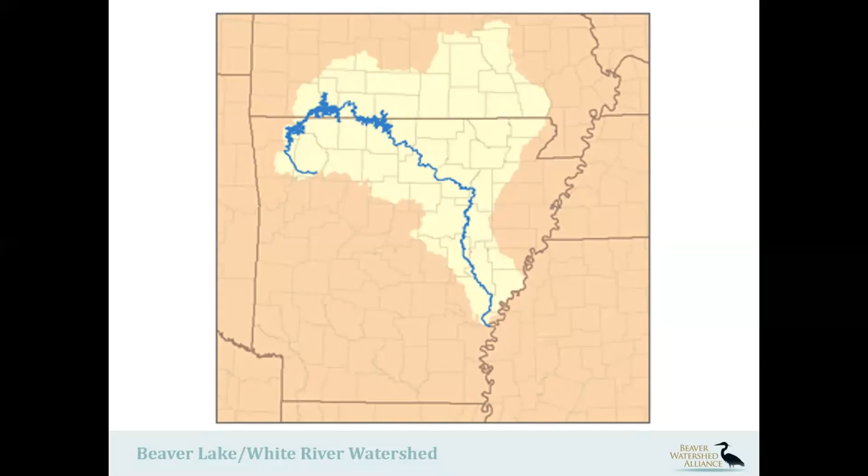Beaver Lake itself was dammed back in the 1960s for flood control. Over the years, though, it became our central water supply. So Beaver Lake is actually our water supply for 1 in 6 Arkansans here in Northwest Arkansas. And this is a picture of state priority watersheds. This watershed is a state priority because it does have stream reaches that are considered impaired, which means they don't reach their designated use, and they are listed on the 303(d) list. So there's a number of different agencies and partners working to address these impairments through different voluntary practices. So anything we can do to help improve water quality, to maintain a healthy watershed, is our goal.

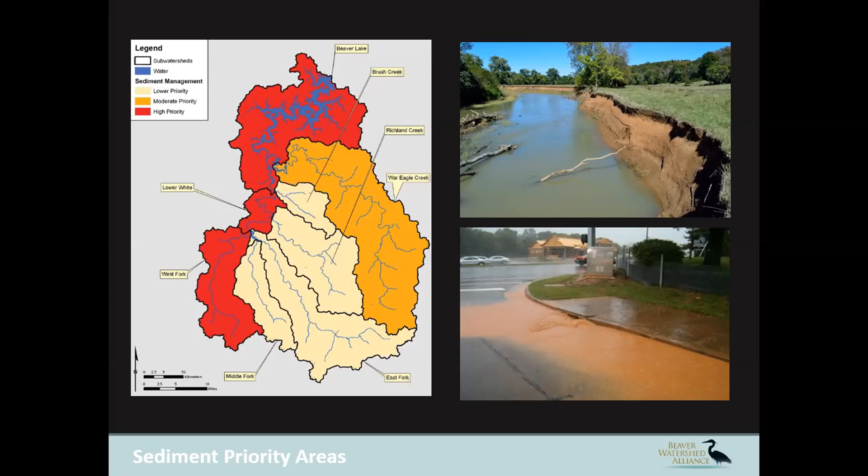So in 2017, the Beaver Watershed Alliance applied for a 319 non-point source grant, and that was awarded $500,000 to install 3 low impact development projects in the watershed. So these are basically demonstration projects where we're going to install permeable pavers, bioswales, rain gardens, things like that, along 3 different parking lots in the Northwest Arkansas area.

So one of them is going to be at Mount Kessler, which is a ball field in Fayetteville, Arkansas, partnering with the city of Fayetteville. The second project is going in at Hickory Creek Boat Launch, partnering with the Army Corps of Engineers. And the third project for the green infrastructure is going in at Mitchison Park, which is located in Huntsville, Arkansas.

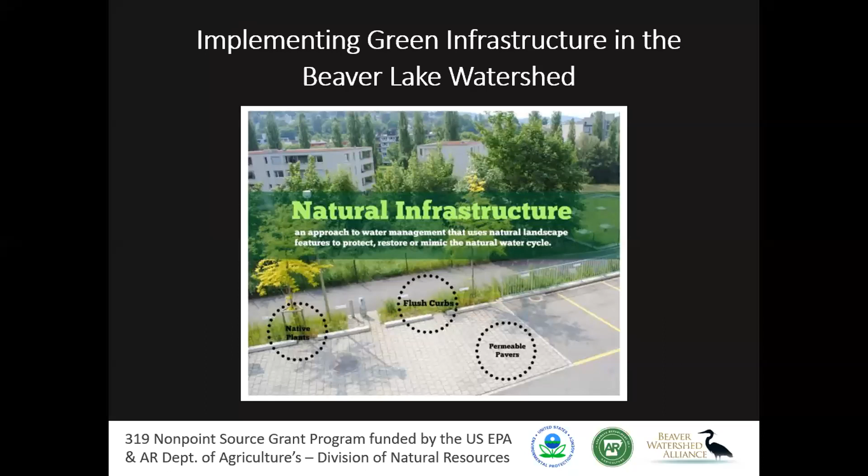So we're really excited to see those being installed this year. Designs have been finalized, and we really look forward to these installations to demonstrate these green infrastructure and LID elements. We also have a number of partners that help us accomplish watershed stewardship. So we want to thank all of our partners that support the Beaver Watershed Alliance and promote healthy water quality for our region.

Okay, so next I'm going to hand it off to Anthony Kendrick. Anthony is a project manager for Construction EcoServices, and he received his bachelor's degree in biology and master's degree in environmental science from the University of North Texas. Before he joined Construction EcoServices, he spent 3 years working for an environmental engineering firm. Currently, Anthony manages green infrastructure projects in the Texas and Louisiana areas while assisting the design community and municipalities to implement multifunctional stormwater management solutions.

Anthony has a passion for sustainable stormwater practice that enhances the built environment. He's dedicated to educating engineers and designers in the practice of the next generation of low impact development. So with that, I'm going to hand it over to you, Anthony.

All right, guys. Well, thank you very much, Becky, for the introduction. Today we're going to talk about how we can use permeable pavement in stormwater management, and then most importantly, what is the best way to keep these systems working?

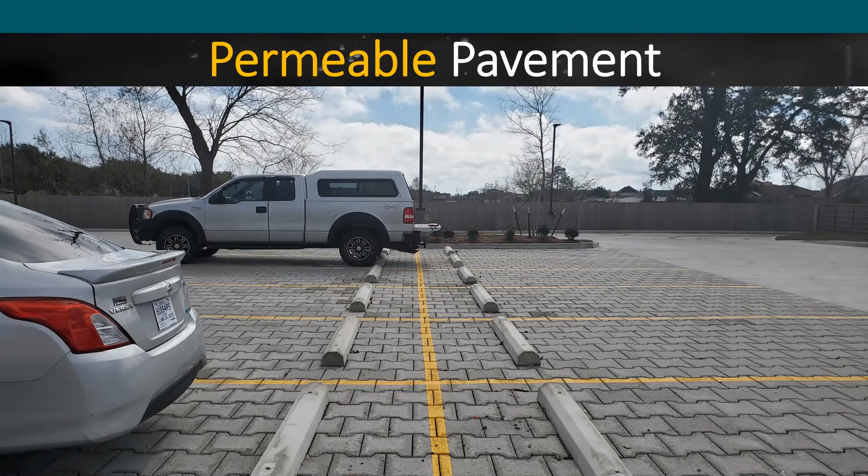So my favorite BMP has kind of switched over to permeable pavement. We've been doing so much of this in New Orleans, and in fact, the ordinance here got updated recently to where every parking stall on a commercial development over 5,000 square feet must be permeable pavement. And so some of these owners who have these large developments can have 200-300 parking stalls that they have to maintain. And so as a designer, you have to be cautious as to what type of pavement you use, how you design it, because you don't want to have that owner pumping lots of money into their budget just to maintain a permeable pavement system.

So these are just either traditional pavers, or sometimes the pavers will have little bump outs and there's a gap in those pavers and it's filled with aggregate. So that allows that water to infiltrate off the paver and into the joint, which then goes into your subbase. That's also a very common practice.

And another thing that I've also seen in New Orleans and also in Houston, this is a pretty big product that they use in the Gulf Coast, are these gravel pavers. So these pavers can be filled with either grass or gravel. It's a very low cost option, and so that's another type of pavement they use.

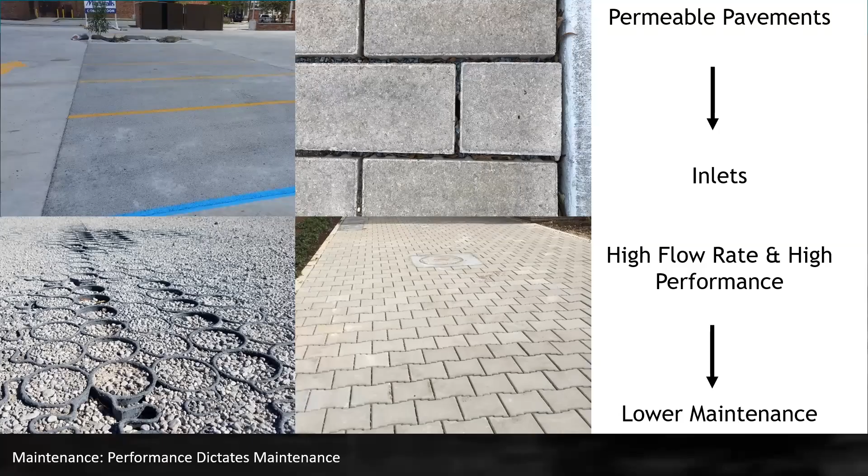So the grid structures, you'll see all different types of products for these. The main difference in the different products you're going to see is what type of plastic it's made out of, and also the height of it. So this vendor right here, they name theirs E30, E40, S50, and really what that relates to is the height of the grid. So the E30 is a little over an inch in height. The E40 is about 1.5 inches, and then the S50 is 2.

It's a European company, so they're using millimeters, and so that's important because that's the height of the gravel that you're infilling. And also the shorter grid structure, that's probably gonna be more for residential, while the E40 module, or say if it's a 2-inch paver or 1.5-inch paver, that's gonna be more for commercial and even heavy industrial applications.

So most of these are all pretty much constructed the same way. You're going to lay down a plastic grid and either fill it with aggregate, or sometimes they'll fill it with soil for grass. And the base of them are pretty much all the same too. They're going to sit on a 57 stone base. Sometimes you can do a choker course of smaller aggregate, but these work best when you just sit them directly on the 57 stone, because it allows that water to get into your base a lot quicker.

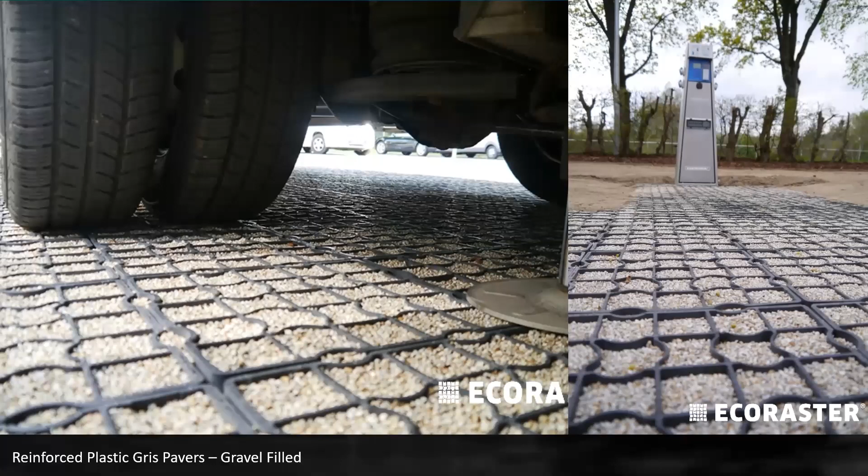And the way that you install these is you don't actually overfill the paver. So you fill the gaps and the voids just enough to where when the wheel load actually traverses across the surface, the load is spread out between the grid structure and the aggregate within it. And we'll talk about why you don't want to overfill your pavers later on, but this is kind of the design intent of this product, to transfer the load between the grid and the rock itself.

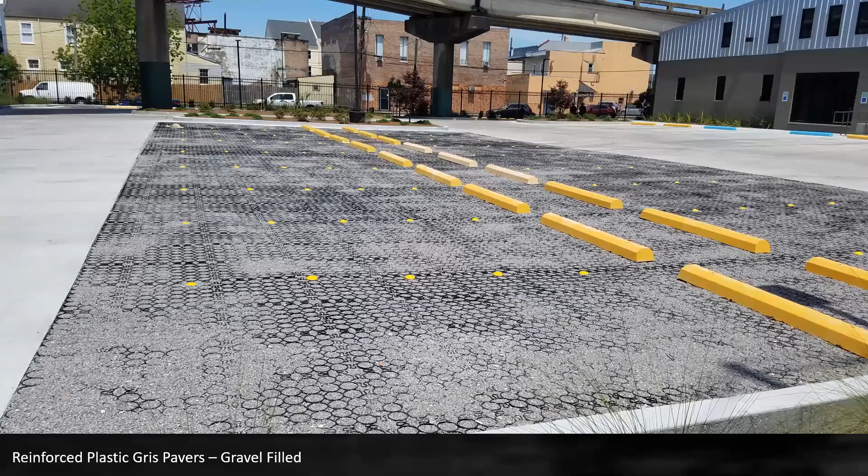Here's a really cool application, I think, of using these gravel pavers. So they're a pretty low cost option. Most of these run like $2 to $3 a square foot. And then they fill it with either some type of chip rock, pea gravel, whatever is locally sourced. The challenge for these, we'll talk about later, is the maintenance.

Since you are filtering your runoff and sediment debris through rock, it can be a challenge to keep it clean. And so the best way to really prevent having to do any maintenance on these or rip them up and reinstall them is when you design them, you really only want to have a 1-to-1 drainage area ratio. So in this project, they do have a little bit of the drive aisles that drain into it, but mostly this is really only accepting rainfall.

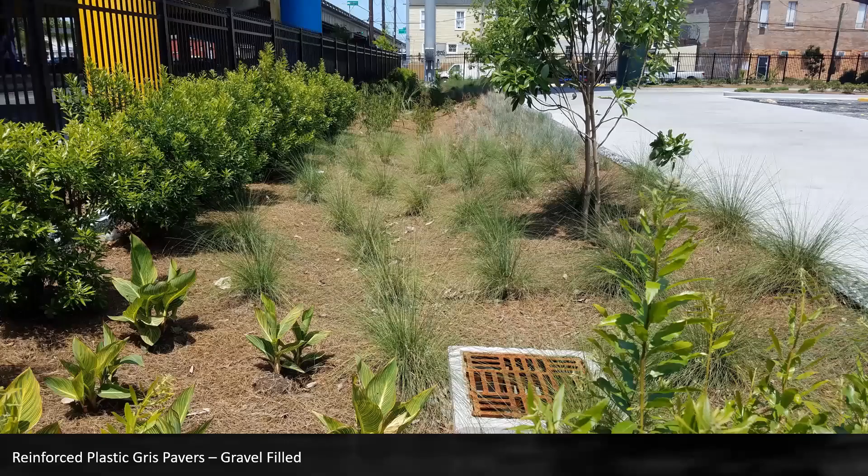And they also slope the entire site so that if the pavers do clog, say over time they start to reduce their infiltration rate, there is a stormwater bioswale on the lower side of the property. So that ensures that even if the owner doesn't maintain it or the system starts to clog over time, there's a way for that water to get off the property.

Because that's always something you want to consider when using permeable pavement, is your safety factors. You can't always assume the owner is going to do maintenance. You can't always assume that it's installed correctly and that it's going to perform as it's intended to. So you want to build some type of redundancy or safety factor into your design.

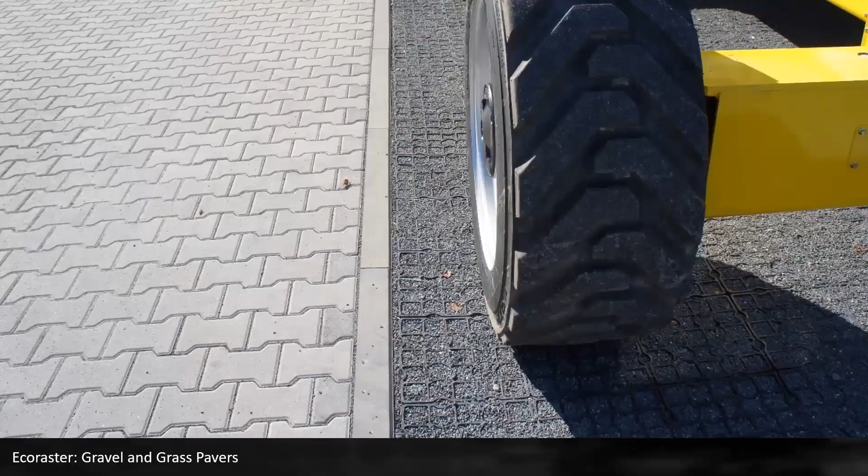And what's really good about these gravel pavers is if you want to use traditional pavement next to it or other types of permeable pavers, these work well. You can lay them in together. You can separate them out by curbs. And then you can also use different options.

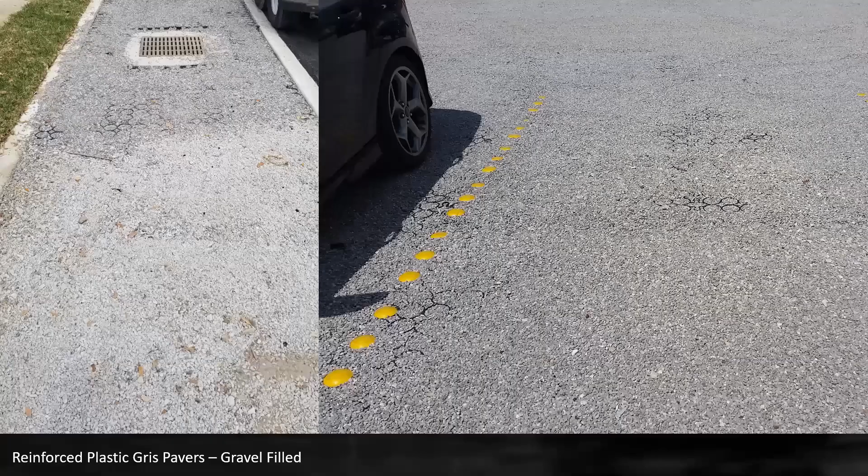So like I said, I think one of the ways that this product gets installed incorrectly or misapplied is when they end up putting too much chip rock on top. And the reason that's not good is because the chip rock, the smaller rock, doesn't handle traffic load well. It can actually crush and turn into a powder or a fine sediment. And what happens is that fine sediment can then clog the rock voids below.

So whenever you see projects where the grid surface is somewhat visible and then they have maybe an inch or two of gravel over top of it, over time, what's going to happen is that crushed limestone falls within the voids of the rock, and then it rains. And we all know what happens when you mix crushed limestone with water. You get concrete. And so to really ensure that this won't happen, you've got to make sure that your installer does not overfill the pavers.

And then also you want to make sure you use a rock. We'll talk about this later with abrasion tests, but you want to make sure you use an aggregate that has enough hardness so it can handle that traffic load. So you can see in this picture, this is really, really small diameter rock. So this is probably not the best type of rock you want to use. I've seen 57 stone, I've seen pea gravel, but you probably want to use a little bit larger diameter rock than what you see here.

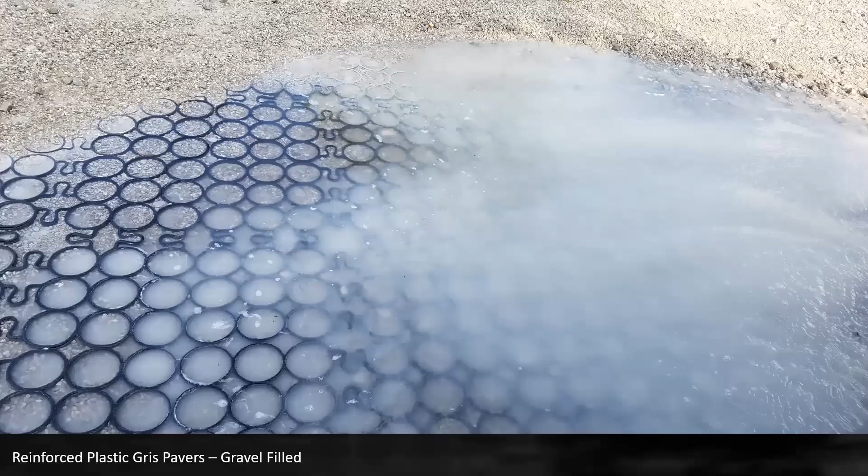And then what can happen, you get ponding water, and you can kind of see in this picture in the top layer how much overfill they have. And then this is just kind of the result. And so you see this a lot when owners think, oh, the grid surface is visible, we need to put more aggregate on it. But you've got to let them know that that's not how it's intended to be.

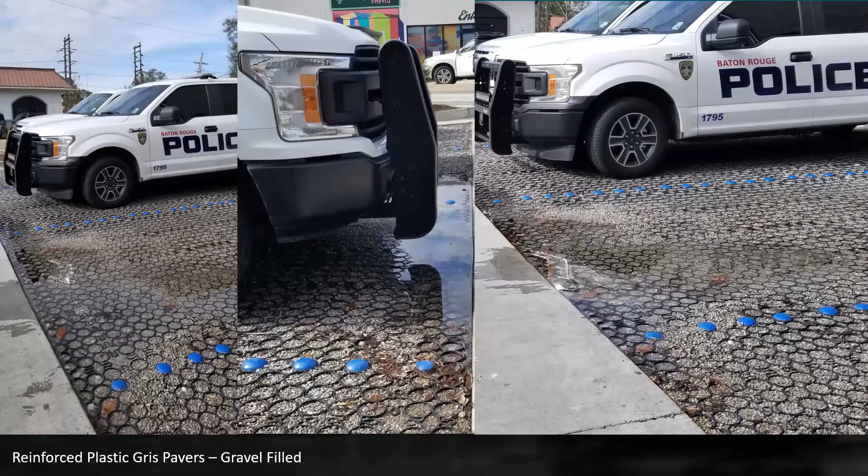And another issue I've seen is where they will put these gravel pavers in areas where you probably don't want to. And so in this situation, this is a restaurant where they put the gravel pavers where the delivery trucks turn around. So this is the only area where a delivery truck can get in and make a U-turn and get out of there. And what happened was this driver accidentally jackknifed and ended up pulling up some of the pavers. So it probably would have been better if they had done a traditional pavement in the drive aisle and kept the gravel pavers in the parking stall.

So these types of pavers work really great in parking stalls. And then if you do want to use it in a drive aisle or where you have a lot of heavy traffic, you probably want to upgrade to the thicker or taller module where maybe you have a 2-inch height, because those can actually handle those types of traffic. While the paver they used here was probably more on the inch or inch and a half height. And so it just makes it really difficult for that paver to handle that traffic load.

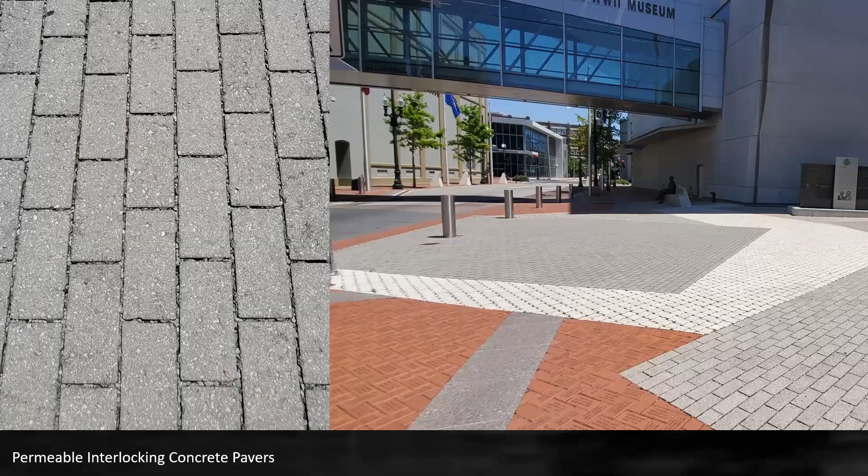So our other type of pavement is the permeable interlocking concrete pavers. This is actually one of my favorite applications of this type of paver. This is at the World War II Museum in New Orleans. And I don't know when they installed this, but if you go out there, these are probably the cleanest looking permeable pavers I've ever seen. They only really get pedestrian traffic. They don't actually ever get any vehicle traffic on it.

So if you go out there, the aggregate looks really clean. It drains down really well. And they also have different patterns in there. And you can kind of see in the picture on the left, you can still see all the aggregate in there. And you don't see much sediment and debris. And that's also attributed to the fact that there's really not a lot of landscape to blow in any kind of leaf litter or debris.

And so this is a really cool application of these pavers in a pedestrian application. And you can see where they did different types of interlocking pavers. So you have these other pavers where they just use the joints along the edges, and then these other pavers basically have the open joint on the corner of the paver. So there's all different types of vendors out there.

And really the big cost difference you'll see between this paver and the gravel paver is the installation cost. The labor to install concrete pavers is much more than your gravel pavers. There's not as much forgiveness with these when you're laying them down. You want to make sure the subgrade's level. So we'll talk about the different costs of these systems, but concrete pavers can be more on the high side.

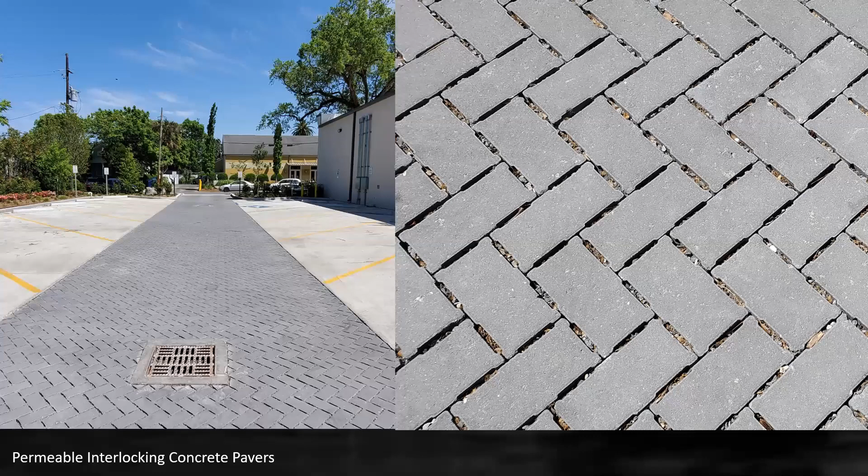And here's a cool application where the parking stalls actually drain to a drive aisle here. And you can see all the aggregate in those joints. This project's actually fairly new, and it hasn't got a lot of traffic because it opened up shortly before the pandemic hit. But they're already starting to see some leaf litter in the joints, and you can see there's a little bit more landscape around here. So in the long-term maintenance of this system they're going to have to really think about how much surrounding landscape is going to start to clog the system.

All right, so we just got a question. Can the gravel pavers or interlocking concrete pavers be ADA compliant? Yes, so far all the projects I've seen have been ADA compliant. In fact, I know the gravel pavers even have parking markers that you can use for handicap spaces as well. But one thing to consider is over time, if the pavers start to sink or have subgrade issues, or if the owner overfills the gravel pavers with gravel, then they can become out of ADA compliance. But generally when they're first built, they do meet all those requirements.

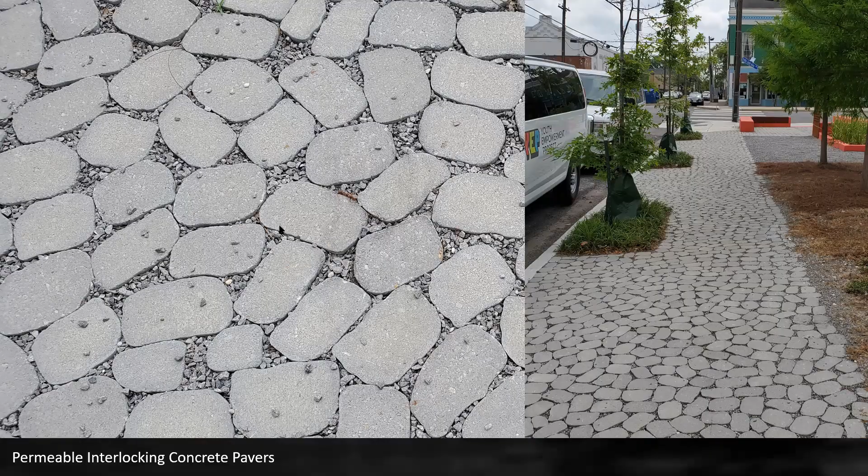So another thing to consider with interlocking concrete pavers is, since you're using aggregate to fill in those joints, they're going to clog quicker than if it was an open joint. So this is a project where the owner really didn't do a lot of maintenance. They had some construction sediment actually clog some of these pavers, and you can see these interlocking concrete pavers are turning into grass pavers. This can be an issue with a lot of concrete pavers if you don't maintain them on an annual basis. What's going to happen is you're going to get ponding water.

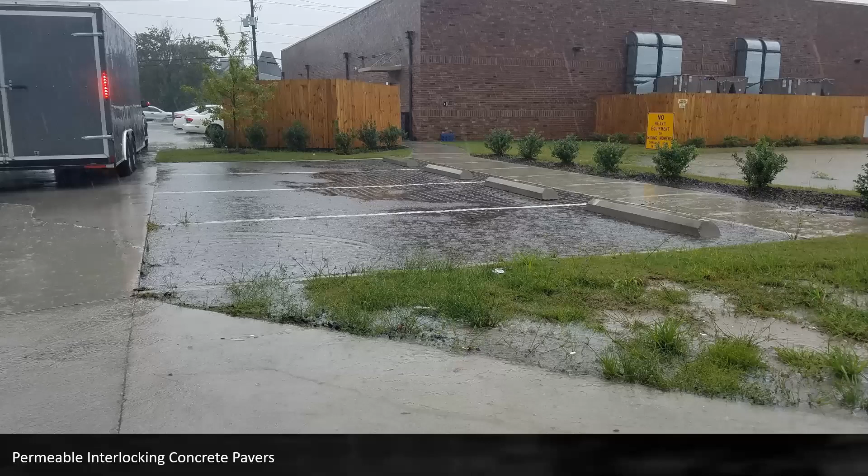And you can see the water that's ponding in these parking stalls, and this is during a pretty big rain event. It was probably about 4 inches of rain we got that day. You can see that pattern matches where all the grass is filling in these joints. And so that's something to consider.

Most of the time you want your permeable pavement to drain pretty quick, especially if it's in parking stalls, because if it takes an hour or 2 hours for that water to finally infiltrate off the surface, that's going to be difficult when you want people to park at your place and they end up stepping in the water. So we'll talk about the maintenance frequency, but I think interlocking concrete pavers hold up better than your gravel pavers, but they do require annual maintenance to make sure that they don't end up becoming a nuisance.

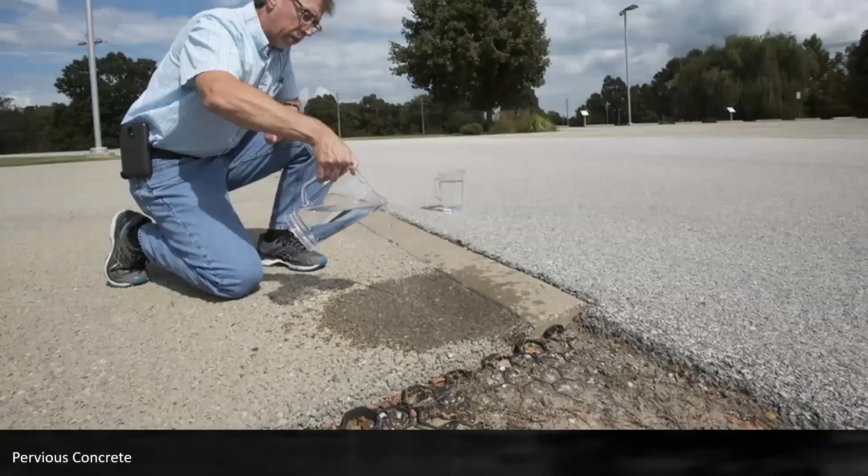All right, our third type of permeable pavement is our porous pavement. So here, this is the pervious concrete that they actually have at the Beaver Watershed Alliance, their main office. And the good thing about permeable concrete is that the entire surface is permeable. With the interlocking concrete pavers, we really only have the joints, but with this type of pavement, you have a lot of surface where you can infiltrate water.

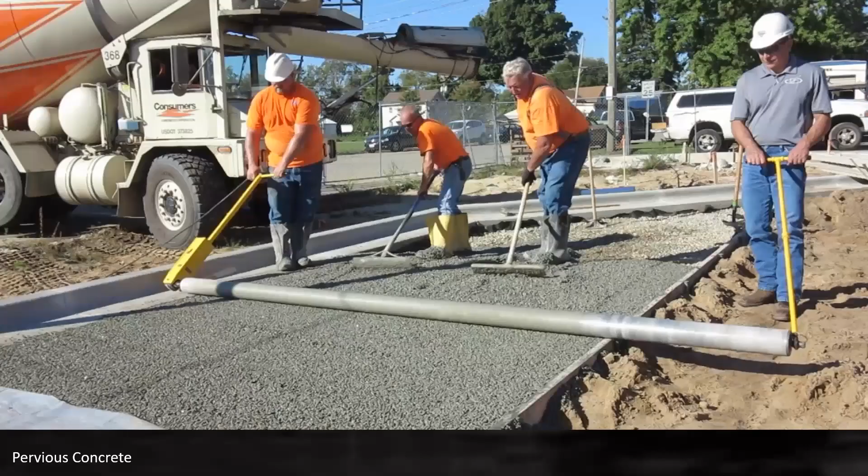So that's good because it kind of takes care of your design safety factors, because you have that whole footprint to permeate water. Now, the difficult thing with permeable concrete is the installation process. So it's much different than traditional concrete.

So the way permeable concrete, or I think the same goes for porous asphalt, is able to soak up water is they actually remove a lot of the fines. So concrete gets a lot of its strength from the rebar and all the fines that they put in there. With permeable concrete, you don't use any rebar, and you also take the fines out.

So in order to counteract that, since those items actually provide structural strength, you actually add a binder, a chemical binder. It's almost like a glue, and what that does is bind all the loose aggregate together while still allowing some voids and open spaces for that water to travel.

And so when you install permeable concrete, you need to make sure you have the right conditions. You can't do it on a super humid day. You also have to make sure that the concrete cures for over a week. So they actually have to cover it with a visqueen layer or an impermeable layer for a whole week to make sure it cures. And if it's not installed correctly, you will have some issues.

And so what I've seen on a lot of projects is you'll see certain parking bays where the permeable concrete looks really good. And then other areas where, let's say the conditions weren't right, or the contractor might've got hurried, their schedule didn't allow them to have as much time to install it. And they'll start having issues where the concrete actually starts to ravel off.

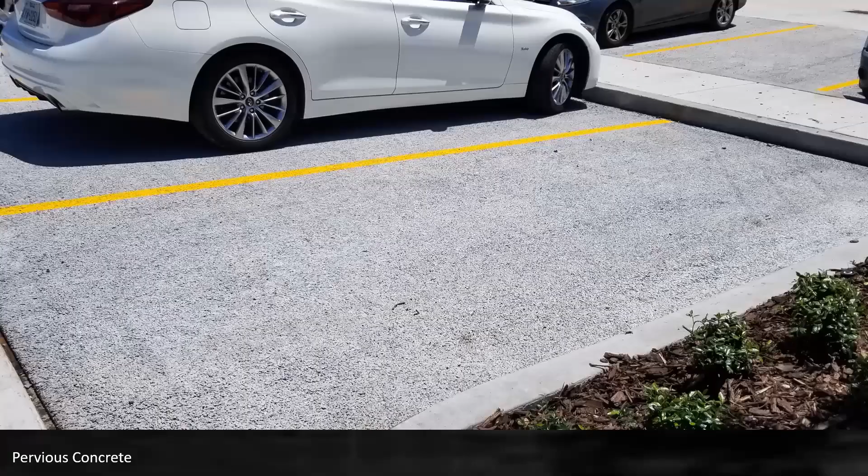And so here's a project where you go out on the site and a few of the parking bays look really great. They perform great. They're getting about 800 inches an hour as the infiltration rate. And on the same project, one parking bay over, the permeable concrete looks like it's falling apart. And so I think with a lot of those inconsistencies, it's going to take a lot for contractors to make sure they're very consistent, but these are some of the risks that you're going to get with permeable concrete.

If you don't have an installer who's really good at this or who specializes in this, you're going to have areas where the binder and the glue, maybe it was too hot that day or there was too much moisture in the concrete. There's a lot of factors that could contribute to this, but what happens is that binder and glue ends up actually breaking down over time.

And I think here along the Gulf Coast, we have a lot of issues with this. And I think that has to do with the fact that we have high temperatures, it's very humid, it rains a lot. We have a lot of vegetation and landscape that can clog it. And so what happens is we see a lot of binder and glue breaking down, and you can actually see where the parking stripe almost disappeared from the site. And so that can be a challenge, and that's something you want to consider in your design.

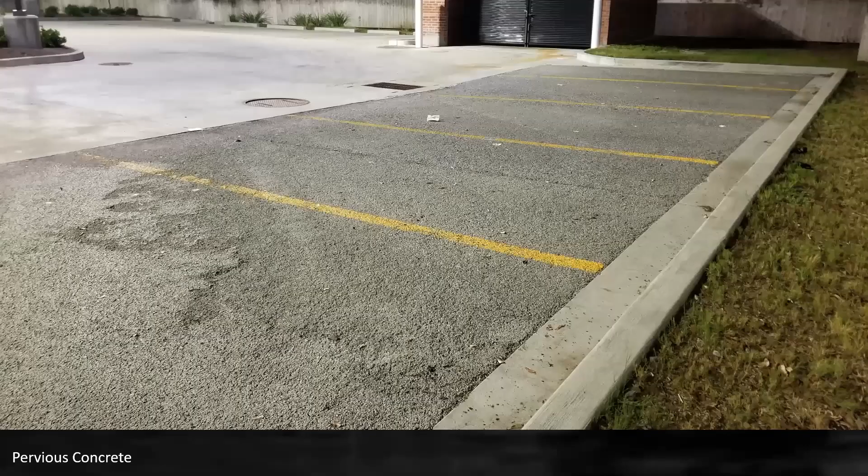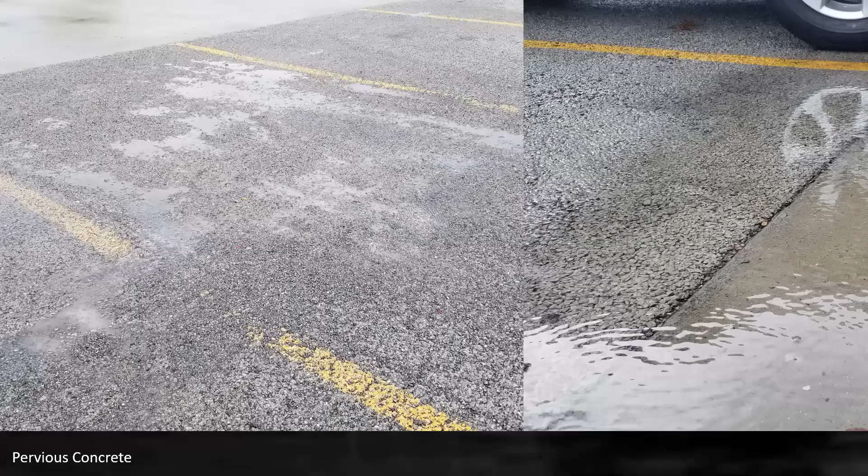And you can kind of see here where there's a little texture difference in the bottom left of the picture and the rest of it, where that top layer starts to ravel off. So that's the process where the aggregate just starts to become loose. And this can become an issue when you get certain areas that ravel, and then that becomes a lower spot in the concrete, so you get a lot of fines that get in there, and those areas will tend to clog. And so when it clogs, you'll get this ponding water.

And then also, if the contractor uses too much binder or glue when they're installing it, they can actually permanently seal off the concrete. So in the picture on the right, you can see there's standing water. So you've got the gutter edge and you've got the permeable concrete next to it, and there's just standing water directly on it. And that has to do with the fact that it was just not installed correctly.

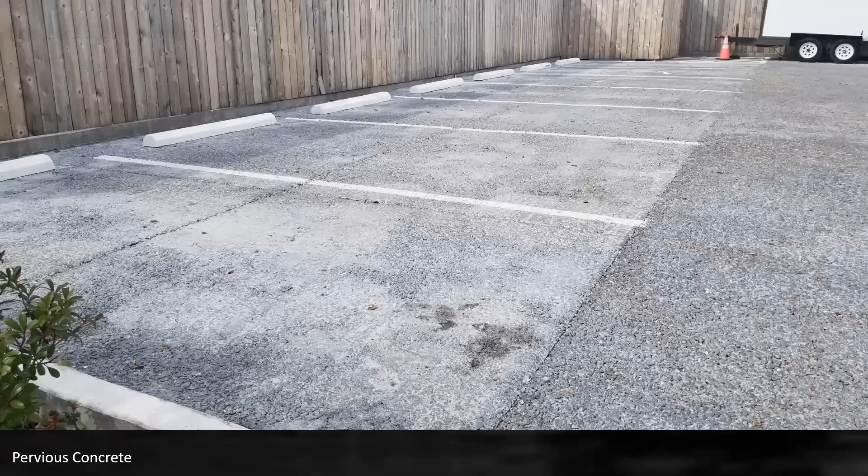And so it's pretty simple and easy to see if pervious concrete has too much binder and glue. So this entire parking lot is pervious concrete, but if you look at these parking stalls, they have these really white splotches everywhere. And that's actually where too much glue and binder was used.

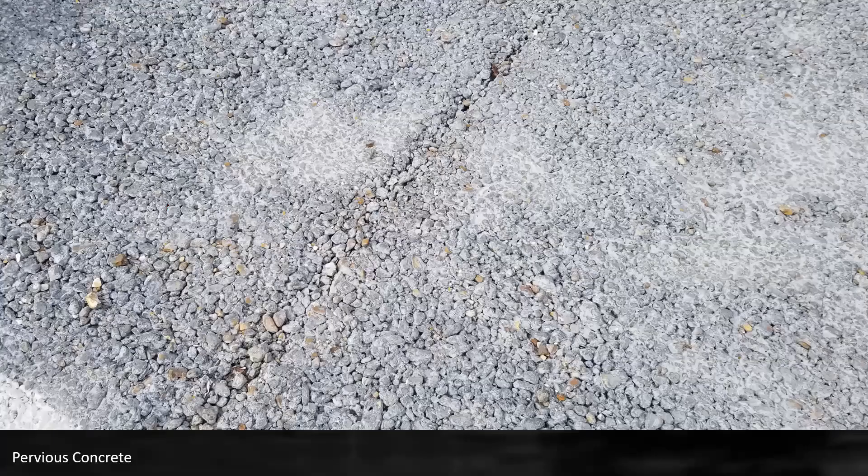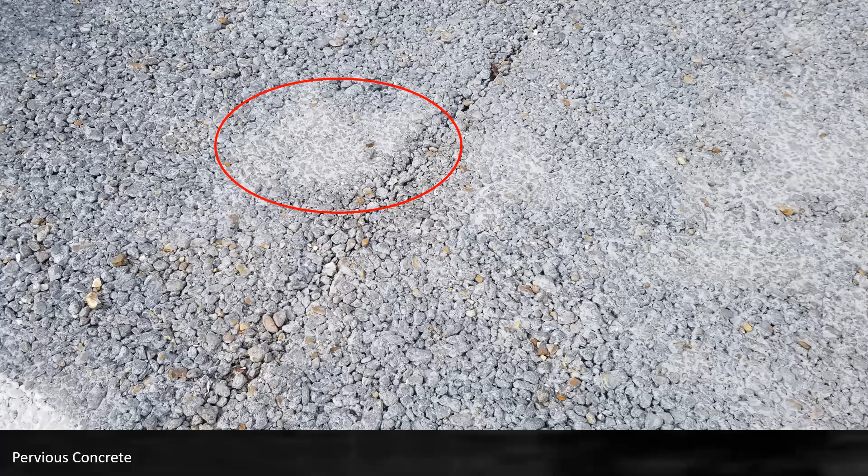And the challenge with porous pavements is, say you install it like this and it doesn't look good, the owner doesn't like it. Well, it's a lot more difficult to pull this pavement up and reinstall it compared to a gravel paver or an interlocking concrete paver. Interlocking concrete pavers, you can pull them up and reuse them. But with this type of pavement, once it's in, you're pretty much stuck with what you got unless you can really force the GC or the subcontractor to fix the problem.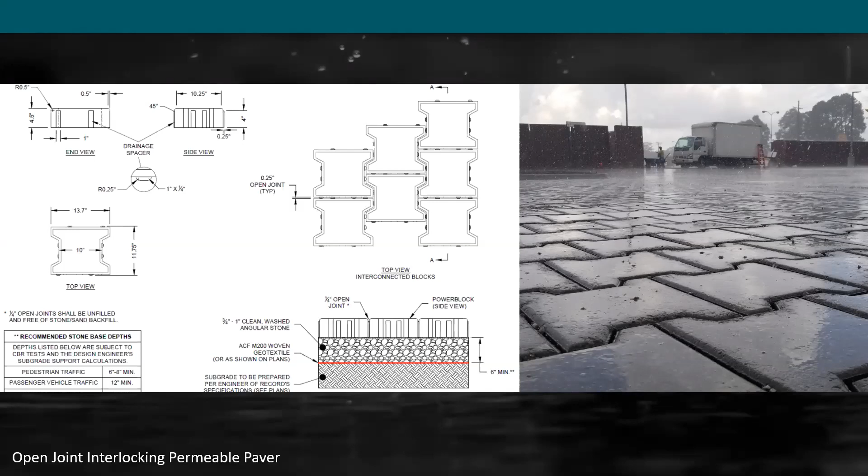And in this situation, this was a medical center we just installed last fall. What you can see here is we actually have a 4-to-1 drainage area ratio. This entire parking lot only has one drainage inlet, and all the surrounding impermeable pavement that you see, that concrete, all drains to these 2 parking bays. This allows the designer to take advantage of basically using the paver as an inlet, as a catch basin. They're allowing that water to infiltrate, and they're also getting detention. Below that paver sits about 18 inches of aggregate subbase, so that's all the detention volume.

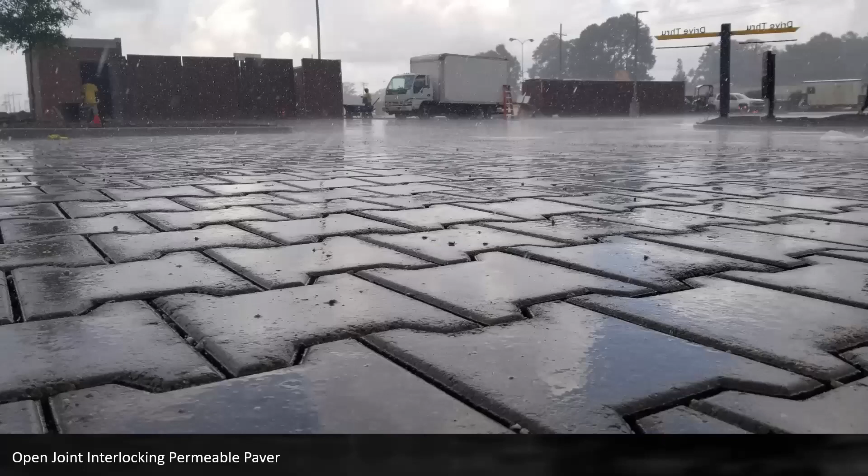And the good thing about these pavers is once they're installed, you can drive right on them. With any type of concrete paver, and those gravel pavers, once they're installed, you can start using it. And you can see these pavers are set directly on top of your 57 stone. They work pretty good. This is actually a picture I took during the middle of a rain event, and you can see that water does not pond on the surface. It gets down in those joints fairly quickly.

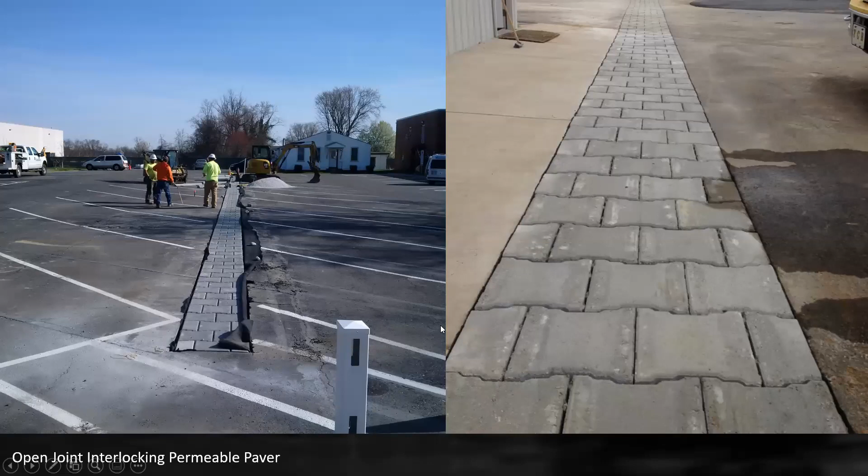Another good benefit of this type of paver is that the high infiltration rate allows you to minimize your footprint. You can see in these 2 examples we have maybe a 2 or 3 foot strip of these pavers, and we're just capturing sheet flow. So if you're doing a retrofit project, or if you want to promote some type of BMP but you still want to use traditional pavement, this is another good way of doing it.

In fact, you can also use this on roadway projects. We have a couple of roadway projects in New Orleans where we call it a green gutter. Instead of doing a traditional curb and pan gutter, you can add this 2 or 3 foot strip of pavement, and it allows that water to infiltrate before it reaches your catch basin. There's other types of pavers.

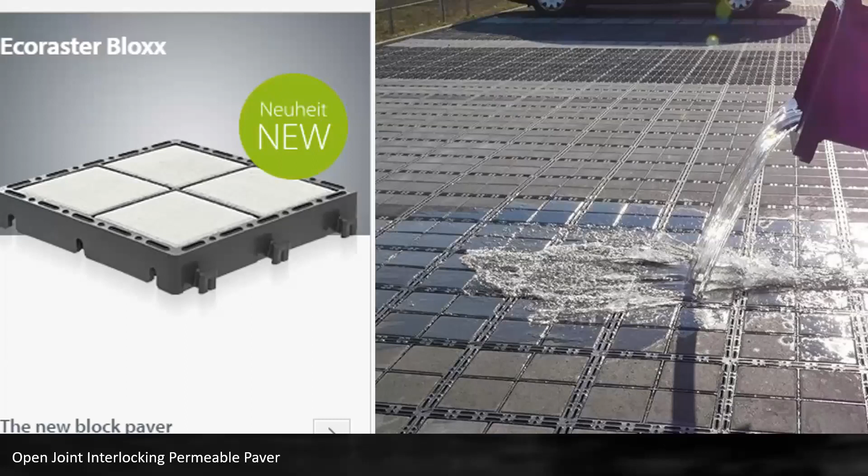So there's this one. This is actually a plastic grid, and then you put these little brick pavers in it. And if you look, there's these open joints along that grid surface. So this is another open joint paver, but it's also a plastic grid paver. So this is another unique application.

And I like this paver because you can use it with your traditional either gravel pavers, grass pavers, or even traditional pavement. And what's really great is you can change the colors of the blocks so you can get really decorative. And so this is another cool application, and you'll see this a lot where they'll do your permeable pavers where the wheels get on the parking stalls, and then you got your grass in between, because the grass tends to grow better when you don't get vehicle traffic.

And so when you do have grass pavers, I think a good benefit is to use these hard surface pavers where the wheels come on the parking surface, and then just let the grass grow in the area where they're not getting much tire traffic. I think you'll get better results when you do it like that.

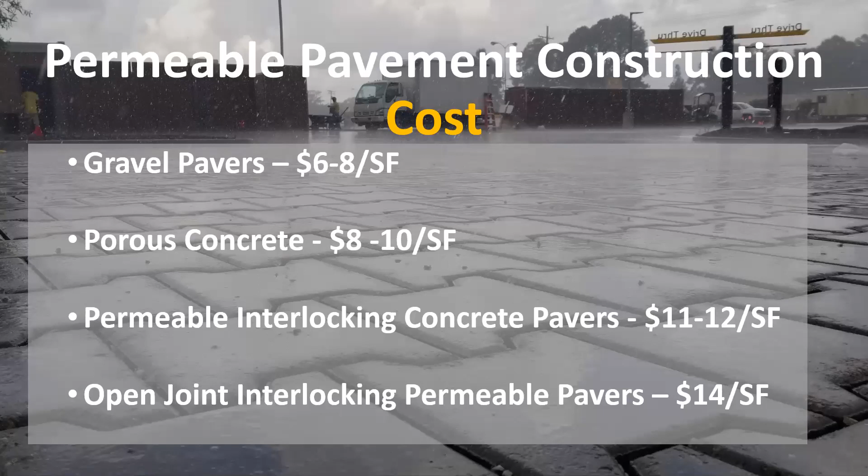And then the interlocking concrete pavers do require annual maintenance, but they'll hold up a little bit better than your other types. And we always recommend when we do maintenance proposals or budgets for engineers, your joint filled interlocking concrete pavers, your porous pavements, you want to do an annual maintenance on those. And that can cost anywhere from $1 a square foot to $1.50 a square foot.

And so if you have a 5,000 square foot permeable pavement, that owner wants to budget $5 grand a year to keep that permeable pavement working. And then your open joint interlocking concrete paver, although it does cost more to install, some of these projects we've gone 5 to 7 years with no maintenance. Our oldest installation we did was approximately seven years ago, and it's still doing really well, and we haven't had to maintain it.

Now the gravel and grass pavers, they're difficult to maintain. Really, the only thing you really want to do is replace any kind of aggregate that ends up getting tossed aside by, say, a wheel. Whenever you get the vehicle traffic, it'll shift some of that aggregate out of there. But once some of those pavers start to fill up with debris, it's a little bit difficult.

So mainly on the gravel pavers, you're more maintaining the gravel itself and making sure it stays within the grid than trying to clean it to promote infiltration. And I'll show you how we maintain these systems.

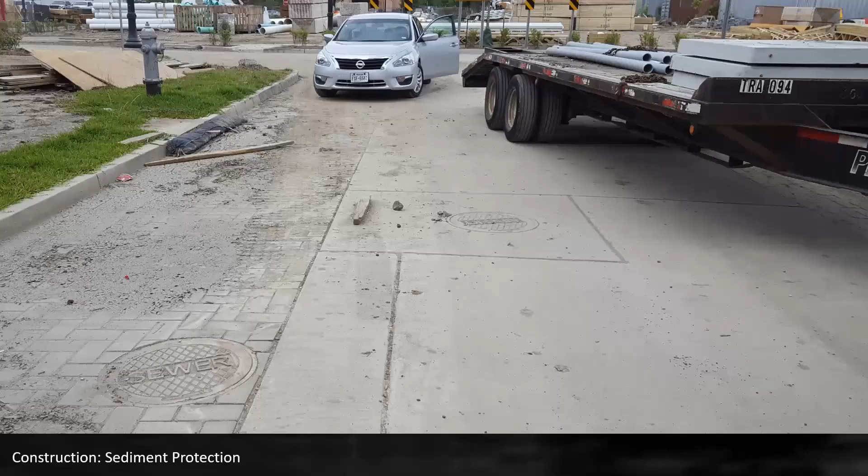Now, the biggest killer, or the biggest challenge, I guess, with permeable pavement is construction sediment. This is the #1 killer of any type of stormwater BMP. You heard Becky earlier saying that their #1 pollutant is sediment. And if you go to any construction site, you're likely going to see contractors not really paying a lot of attention to the sediment runoff.

And this was actually one of our first permeable pavement projects that we came upon in New Orleans. You can kind of see where the contractor put an inlet device on the catch basin to keep sediment out. But look at the pavers. They have dirt all over them. All those joints are just completely filled up with dirt and debris. Most contractors don't really understand that the permeable pavement is also an inlet.

Okay, we got a question about how these systems work in snow and ice. I know most of these systems do really well in freeze and thaw because you have so much void space where the water can expand in the subgrade and also in the joints of the pavers. And I know the gravel pavers, they use a lot of those up north, and they hold up pretty well with freeze thaw.

In fact, you can actually take some of your permeable pavement and heat it up. There's actually one vendor who heats up their permeable pavement to melt ice, so it's kind of cool. But I don't think freeze thaw is too much of an issue as long as you have plenty of room in your subgrade, and your pavement has those open pores in there.

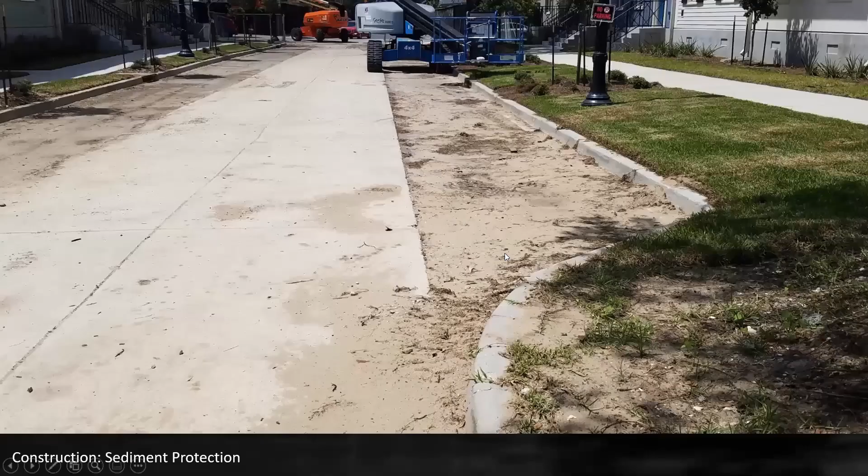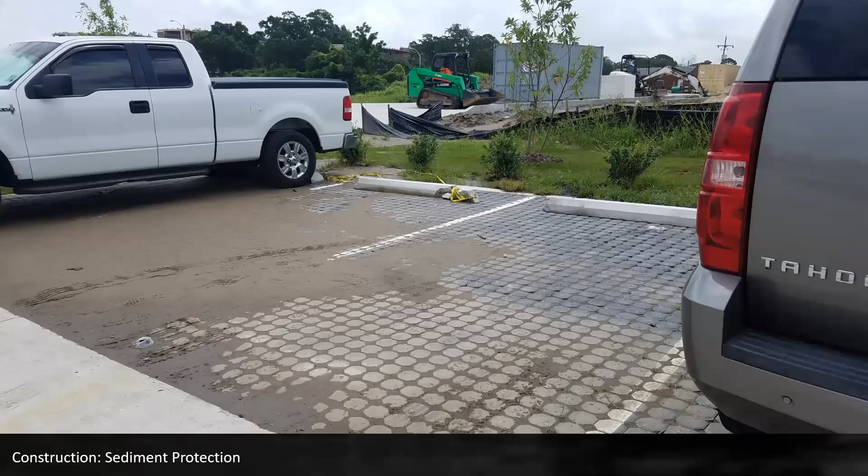A lot of times contractors will install these permeable pavers when they do the pavement, but sometimes the landscape comes in afterwards, and so you'll still have a lot of loose sediment and debris that washes off your landscape islands. You can kind of see here, all the parking bays are just completely filled with sediment. So this system hasn't even got a chance to work yet, and it's already clogged. So what we like to do is cover that system up with fabric.

And this is a situation where the next door neighbor was doing a construction site, and their silt fence got knocked down, so all the sediment washed onto the adjacent property. That's a little bit unfortunate, but those are some of the issues you have to worry about with permeable pavement.

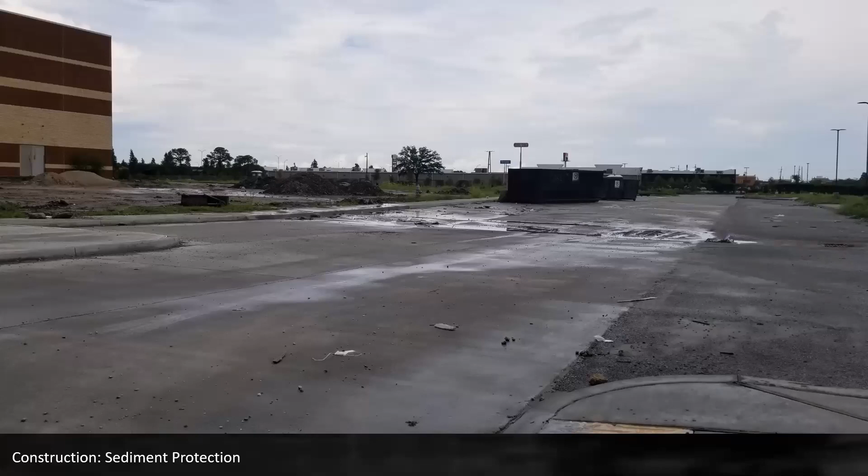And here's another project that was actually one of the largest installations of permeable pavement I've ever seen. It's got about 250,000 square feet of porous concrete. It's a very large mega church out in New Orleans. You can kind of see the permeable concrete is getting a lot of sediment and debris. If you look at that drainage inlet on the right, here's a close-up view. They're just allowing all this sediment and debris to wash onto that permeable concrete.

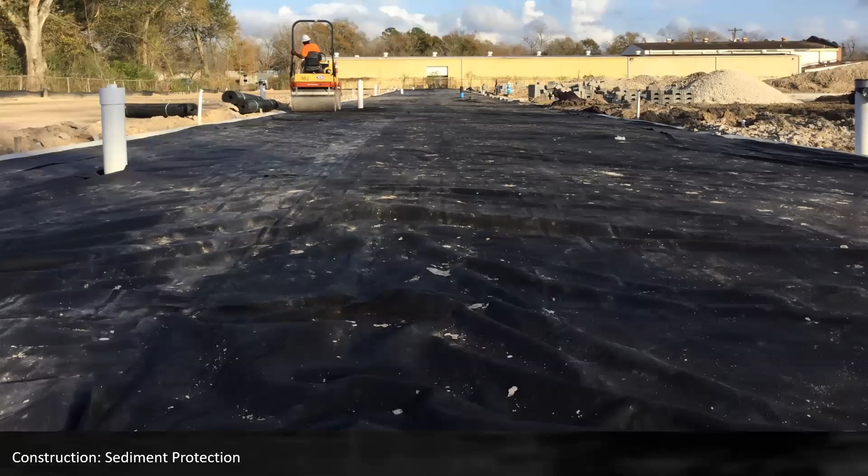Some of these areas are probably already completely clogged, and once they clog like that, sometimes it's really difficult to maintain them to promote infiltration back. Sometimes they completely fill up with sediment and you really can't do much about it. So when you install your permeable pavement, we actually cover it up with a filter cloth. Just like a lot of contractors will put geotextile cloth over the drainage inlet, you can do the same with permeable pavement.

So this is a project in Houston where we installed all the permeable pavement. It's kind of like a townhome development with all the condos and the drive aisle in the middle. We knew that they were going to be doing a lot of building for the residential units, and they could potentially get sediment on there. So we covered up our entire system to protect it from getting clogged. It works really well because you can still drive on it, and at the end of the project, they just rip off that fabric, and they've got clean permeable pavement underneath.

All right, well, we'll move on to some of the design considerations. So one thing you want to consider when you're doing permeable pavement is your soil bearing capacity. So what that really is: what kind of traffic load can that soil handle? So a lot of times you're working with soils that are either weak or clay soils that will tend to soak up water and swell or shrink. And so that could be a challenge for permeable pavement.

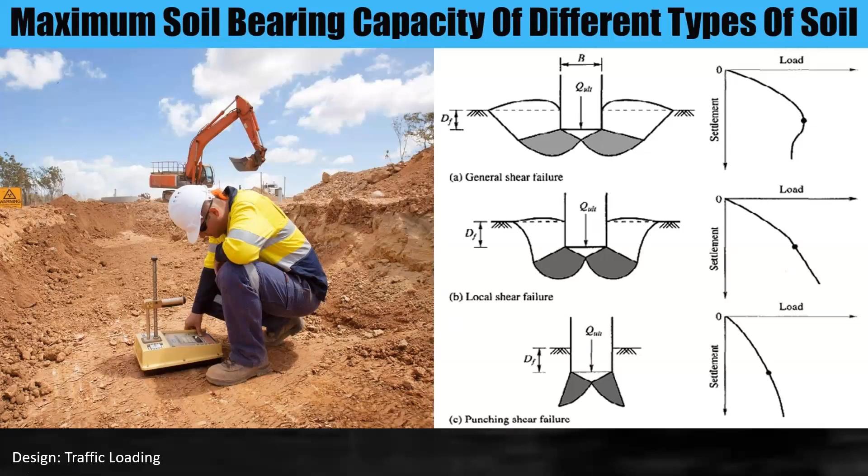So the first thing I recommend is have your geotechnical engineer look at your soils report and make a subgrade recommendation. So your geotechs are already usually looking at your soil, making a pavement recommendation for the concrete or the building foundation. So it's not much more for them just to go, okay, well, if we're going to have permeable pavement, how thick should our base be? Should it be 6 inches? Should it be 2 feet? I think the worst case scenario we've seen is 2 feet, but I've seen a minimum of 6 inches, and the soil will hold up pretty well.

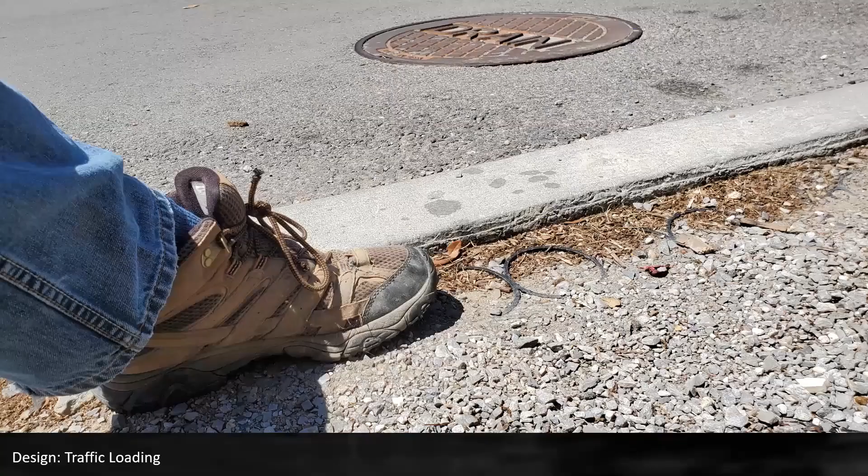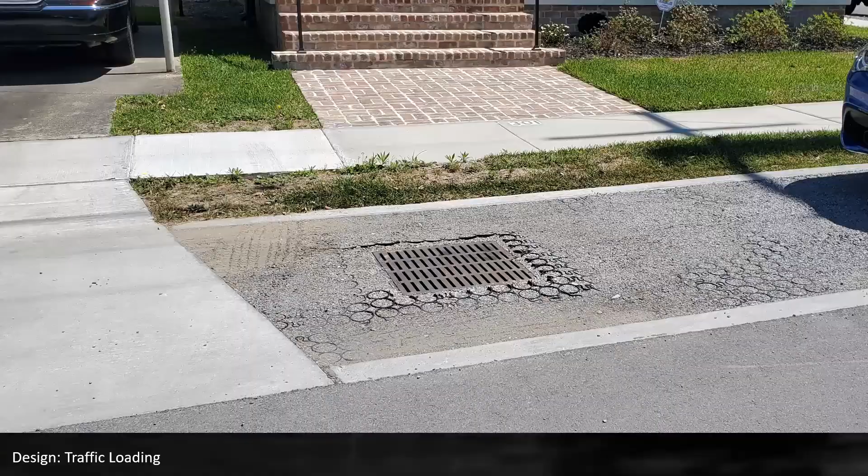And subgrade failure is pretty common with most types of permeable pavement. And so here's an example where the grid structure started to settle next to the curb, and so you'll see this with interlocking concrete pavers and other types, and you can kind of see here where the inlet stayed up high, but then the pavers are starting to settle below.

And then here's an example where it's kind of hard to see where the dip is, but if you look at the parking stripe lane, you get a curve. So you definitely don't want to see a curve in that line. That just kind of shows you where, when the vehicle comes off that traditional pavement and then drives onto that permeable paver, that's where a lot of the load comes off of that, and so it ends up creating a dip right next to the interface of your traditional pavement.

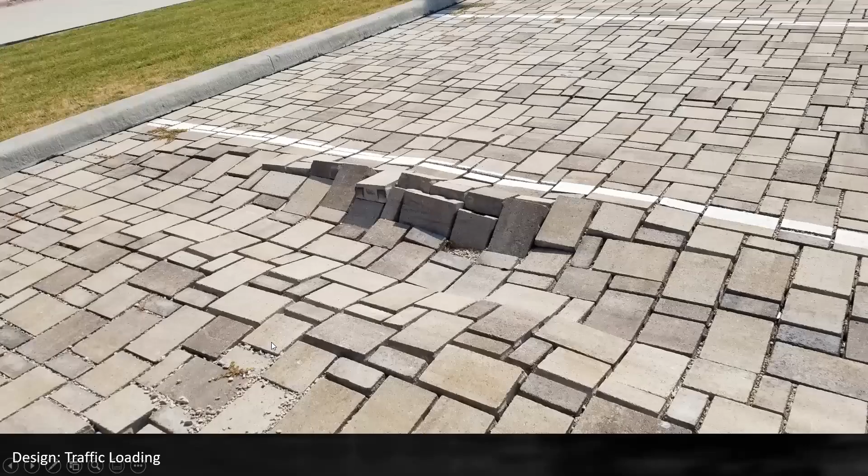And so, in fact, there's one city in North Texas where they were using a lot of these permeable pavers, but a lot of the contractors started skimping on the subgrade. They were just using the bare minimum. They weren't really using a thicker base. So the city started seeing a lot of issues like this where they're getting subgrade failure. So they ended up just removing this BMP altogether from their stormwater ordinance because they just didn't want to deal with these issues. But I don't think that's always necessary. I think if you talk with your geotech, you can do a subgrade that's not gonna settle over time.

And another thing to consider is your curbing. So a lot of times these systems are either butted up against traditional pavement or they'll have a curb around it. So we like to use usually a header curb or a ribbon curb where it might be 12 inches deep and 6 inches wide. And the reason you want a hard surface there is so when that traffic load comes off that paver, you want it to hit a hard surface. You don't want it to have just loose aggregate next to the paver because that can then start shifting that subgrade below, and that's where you get the dips or the subgrade failures.

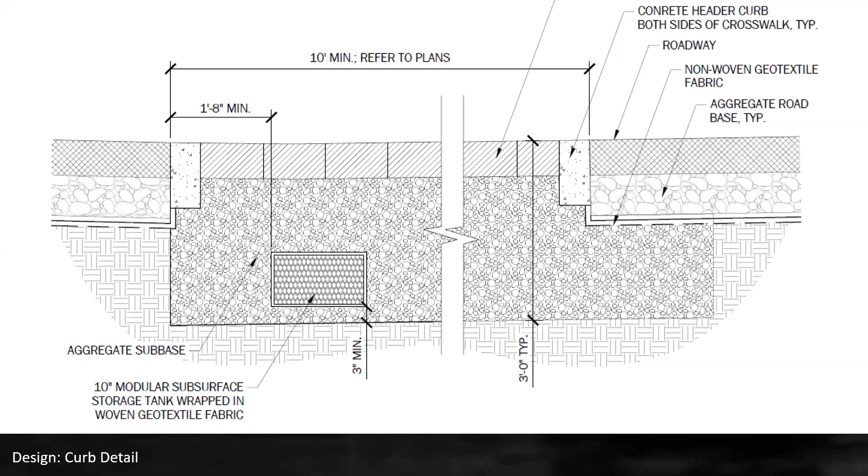And then also, if you look at the different types of subgrades, most of the time we'll just install a 57 stone base, or maybe we'll install a larger stone diameter in the bottom, like a number 2, number 3 stone, and then we'll do 57 stone on top. Pervious concrete and your open joint pavers can sit directly on top of that 57 stone. While if you're going to use an interlocking concrete paver, you're probably going to use a choker course or a bedding course. So this is your smaller rock, like number 8, number 9 stone.

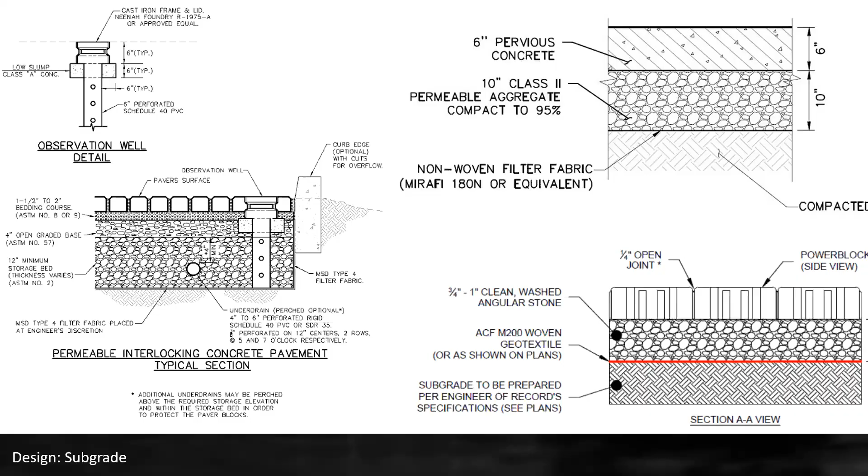And I would rather use just 57 stone because it infiltrates faster. Sometimes that bedding course can restrict the flow. So you'll want to make sure that you're not using too fine of a bedding course. You want to have some type of void in there. And then also you'll want to consider what type of subgrade or geotextile you use.

And so, whenever we use aggregate, we're sourcing it locally. So some places, I think it's up in Indianapolis, they get a lot of soft limestone. And so you want to make sure you get limestone that has a hardness value, or what we call a Los Angeles abrasion test.

And that's all it's doing is that tells you how sturdy, how resilient is that aggregate? Is it going to crack under traffic loading, or is it going to hold up? So one thing that you can do is you can request your contractor to give you an LA abrasion test and a gradation report. So a gradation report will let you know, are you getting a lot of fines in your aggregate, or does it meet the ASTM requirement for 57 base or number 2 base?

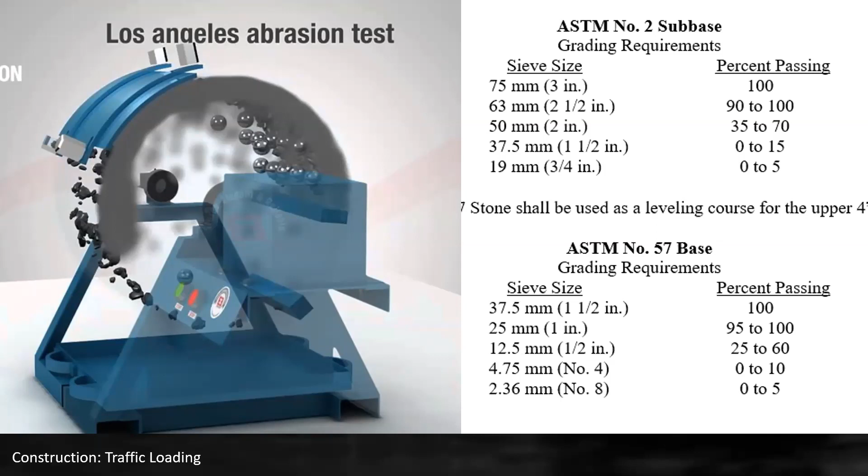So putting those in your submittal documents, your abrasion test and your gradation report, I think should be a part of your permeable pavement submittal. It's not just the pavers you're worried about, but it's also that subgrade. And then when it comes to geotextile fabric, we mainly use a woven fabric that we'll put on the native soil before we install any type of aggregate base. And that just kind of helps

spread out that load. And then you can also use fabrics that have a grid interlaced with them. So there's actually woven fabrics that will have a plastic grid in it, so that's even more sturdy. But if you've ever seen highway construction or pavement construction, they're always going to use some type of geotextile fabric, and that just kind of helps separate your aggregate from your native soil. So make sure you don't use a cheap fabric, go with a more durable one.

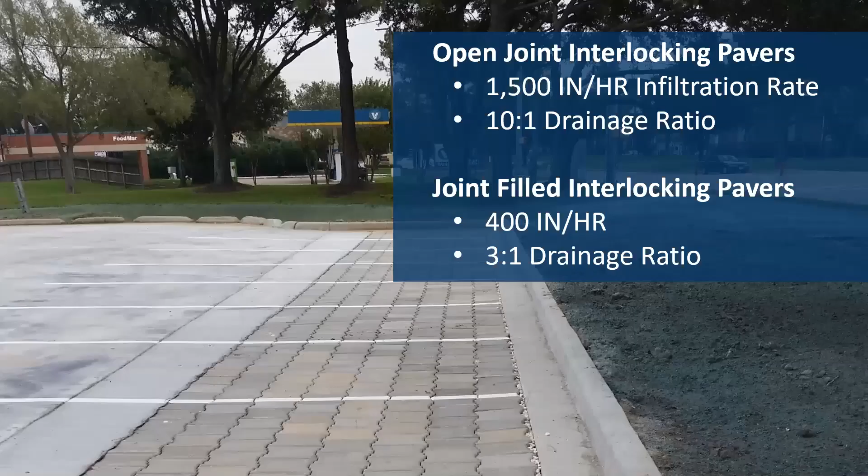And then let's talk about some specs. So, the whole is greater than the sum of its parts. A lot of times, contractors aren't going to read specs. They're always just looking at what's on the plans, and then, hey, is there any type of value engineering, or is there another alternate product that we could potentially use to save us some money? And so it's always important to establish your specs so that your contractor can build what they want, but still meet your design intent. That's what your specs are there for: protect your design intent.

So here's an example. Let's say you specify an open joint paver. You want it to infiltrate at 1,500 inches an hour, and you want a 10-to-1 drainage area ratio. So you might have a 10,000 square foot parking lot, but you only have 1,000 square feet of these open joint pavers. Well, if your contractor was able to find a cheaper paver, but it's an interlocking concrete paver, that infiltration rate is a third of the interlocking open joint paver, and also it has a smaller drainage area

ratio. So here's an example where you can see here in the blue box, that was our open joint pavers, and you have a pretty large drainage area ratio. But if we wanted to use an interlocking concrete paver, we would have to expand the footprint, right? Because our infiltration rate's lower, and we also can't do our drainage area ratio as high. So we have to kind of spread out that footprint.

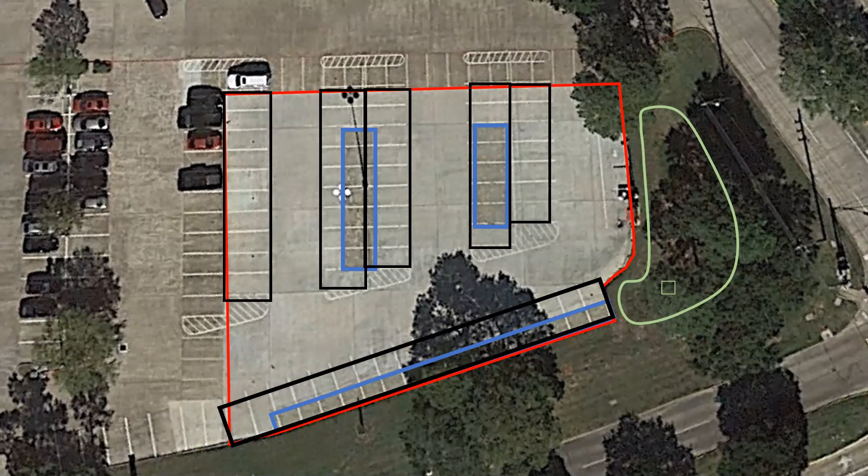So contractors might not necessarily think about this. They might just think it's an equal swap, but you always want to make sure your specs are to a point where they can't jump out of bounds and end up risking your design intent. And then one thing that we like to do with our specs, so this is actually a spec that we have in our open joint paver, is we will establish when the pavement needs to be maintained.

So sometimes you can do like an infiltration rate. So you'll take 6 random tests of the permeable pavement. If it infiltrates less than, say, 200 inches an hour, then you need to maintain it. Also, if your pavement's ponding water, that's probably a good indicator. And so you can write those specs in there. And another thing, if you look at part B of that maintenance, what we do is we actually include a maintenance warranty. So you can do this either through the distributor.

So for instance, we'll distribute certain products and we will provide a maintenance warranty. Usually it's 3 years, but sometimes we'll make it longer. And so you can either have the distributor do a maintenance warranty, or you can have the installer, and you can make sure that they put that in the budget. And what that does is it gives that owner a little more comfort room and reduces their risk. Because a lot of times, if there's anything that's going to go wrong with erosion or construction sediment, it's going to be early on in the project. So having that maintenance warranty is really good for the owner.

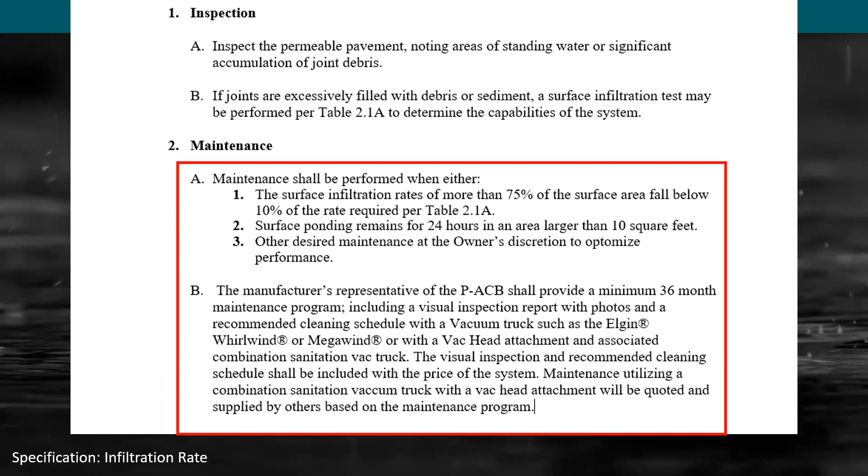And if it's a municipality, it really kind of helps reduce that risk. And this is pretty challenging because porous concrete, for instance, is provided by a ready mix company that makes the concrete, and then you have a paving contractor who buys it and installs it. So far I have not seen anybody do a maintenance warranty for porous concrete. But for the open joint pavers, we do that. And then you should be able to find some type of distributor who would do that for the interlocking concrete pavers.

And another spec that we also like to do is your infiltration rate. So if you're going to spec in a permeable pavement, I think 1,000 inches an hour is a good baseline for most types. Porous concrete, you can achieve this. The gravel pavers, you can get pretty close; I think gravel pavers usually hover around 800 inches an hour. The open joint pavers can definitely meet this. The interlocking concrete pavers have a little more of a challenge. They're generally around 600 to 700 inches an hour.

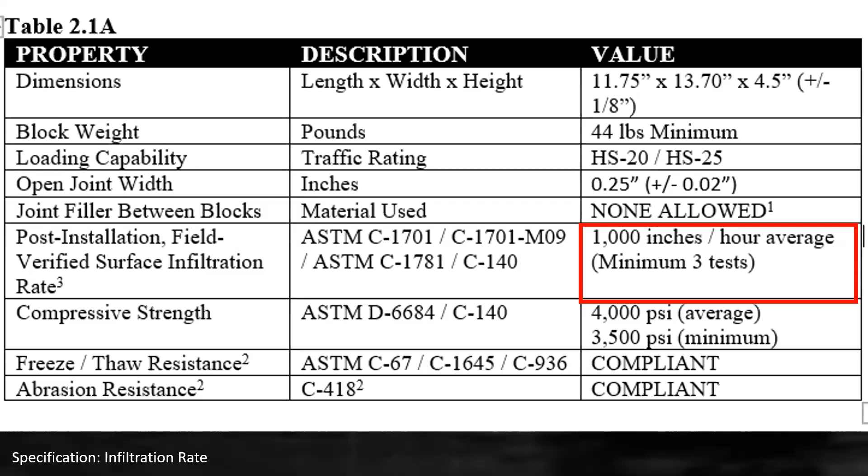So probably as a baseline, I wouldn't specify anything less than 1,000 inches an hour, because one thing you've got to consider is, over time infiltration rates can decline. So if you start at 1,000 inches an hour, it could take some time before it gets down to 0, or say 100 inches an hour. So make sure that you specify an infiltration rate as well. And you can see there's also a freeze thaw resistance in that spec as well.

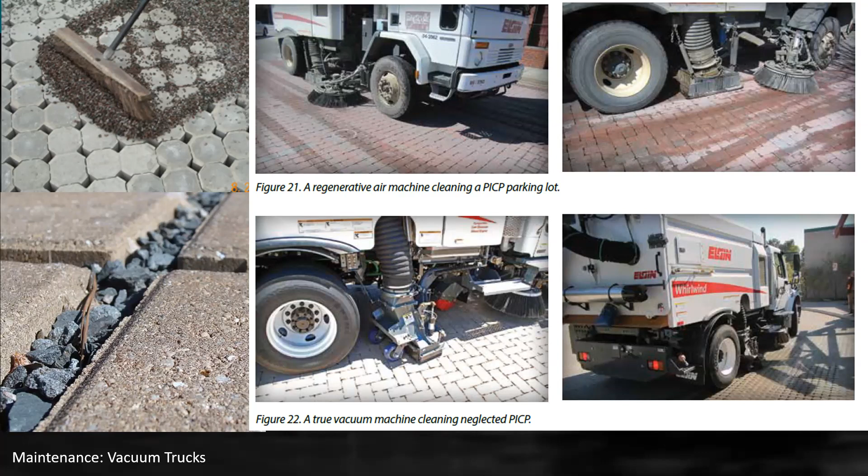So what they'll do is that truck will spray water, it'll run the brush, and then they can just suck out, if it's an interlocking concrete paver, all the aggregate, and then you'll sweep it back in. Or if it's an open joint paver, you just drive over it. It's only a one-step process. But you can also use this on porous pavements as well. So this is kind of what the truck looks like. We got to see a couple demos of them.

The only downside of this, you don't see a lot of these out in the market, and they're pretty expensive. So if it's a maintenance contractor, they would have to have a lot of permeable pavement to maintain to afford this truck. And if it's a municipality, they're not necessarily going to have these types of trucks because they might not have enough permeable pavement to clean.

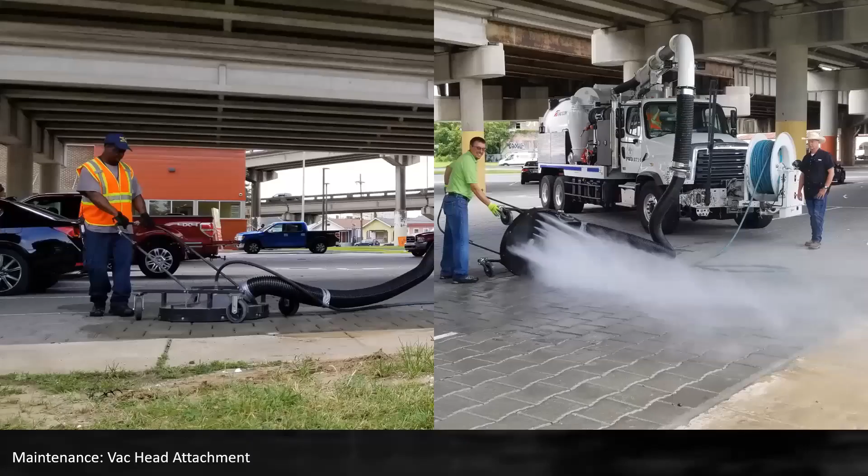But what you can do is attach vac heads to your standard Vactor trucks. Most cities will have these Vactor trucks that have what we call a hydro excavation unit. You see that water hose on the front of the truck, and then they'll also have a big suction hose coming off the top. They use these a lot for sewer cleanouts, but you can attach this vac head.

What you do is you pump water from the truck, and it has a wand that spins, and it's pretty much like a high pressure car wash. That water will lubricate all the joints. It will pull up some of that sediment, break it up, and then the vac hose will suck up all that loose material out of those joints. And this works pretty well. You are kind of limited in your footprint, it's a little bit smaller than the vac head on the Elgin Whirlwind, but this works great when you don't want to buy a specific truck.

These things cost $8,000, so you can retrofit your entire fleet for a lot less than buying a new truck. And we've used these on different types of pavements. We've used it on the porous concrete. Here's some that we used. This is a city here next to New Orleans that installed some permeable concrete, and they wanted to test it out. And we've also done it.

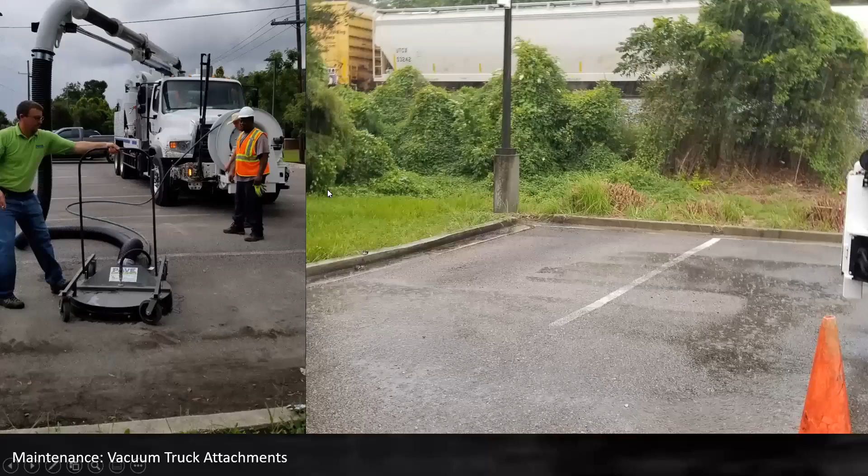This is porous asphalt. What's really interesting about this is we did a little demonstration for City Park, and I don't think they ever maintained their porous asphalt. So they had a lot of sediment and debris piled up into the low part. We came out there with a vac head and partially cleaned this parking bay, and then it just started pouring down rain. So when I drove by it, you can actually see the footprint of where we cleaned. You can see water ponding around it, and then these little areas where the pavement looks dry because the water's just infiltrating.

So these vac heads can work pretty good. But again, if you wait too long to clean your pavement, these vac heads can't always resurrect the pavement, but they can do a pretty good job if you have a regular maintenance schedule.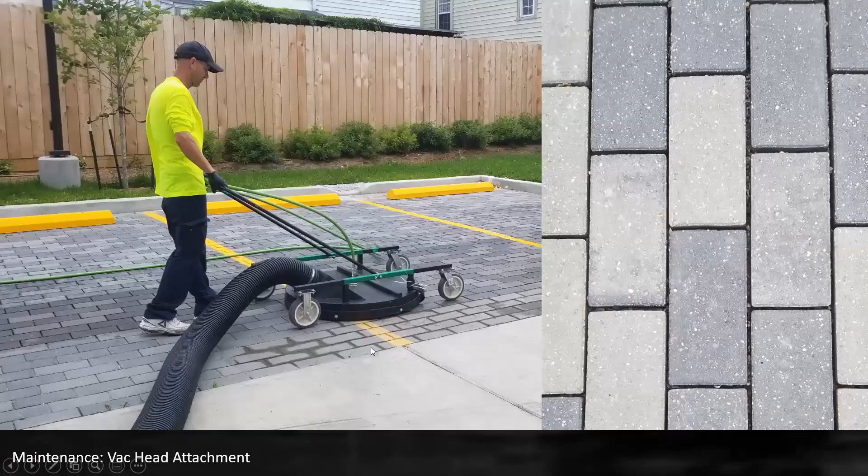And here we're using it on an interlocking concrete paver system. On this project, the general contractor ended up getting some construction sediment on the concrete pavers. So before they handed the project over, the designer had them come out with a vac head and clean out the first half inch or so of those pavers to get that sediment out. One thing to consider is that interlocking concrete pavers with aggregate are a two-step process. You have to suck up all the aggregate, purchase new clean aggregate, and replace it. So it can be a little more maintenance intensive, but we can still maintain that type of pavement.

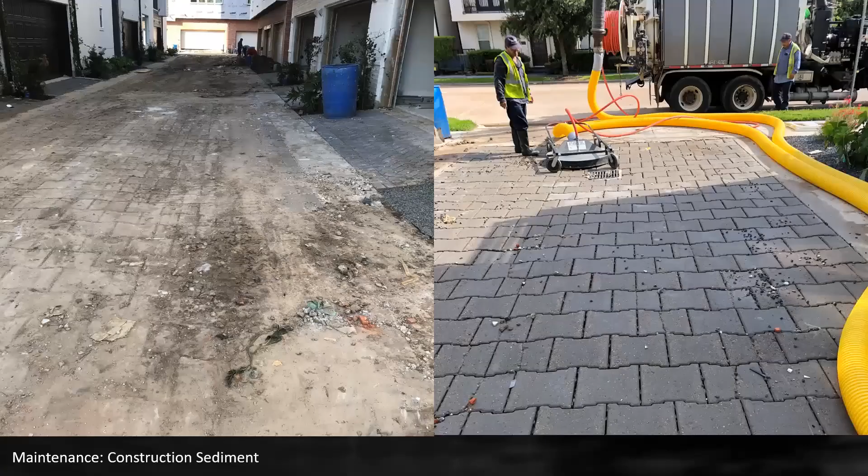Here's a worst case scenario. This is a project in Houston where we installed these open joint pavers, and you can see the general contractor pretty much treated our pavers like a dumpster. There were nails, lumber, pieces of wood, and probably a 1/4 inch of sediment over the entire system. So we spent 2 days out there with this vac head, and we also had to use a high pressure hose because there was so much debris in these joints. It took 2 full days to clean this, which should have taken less than 1 day on a normal maintenance interval.

But this shows you that if you don't provide sediment protection during construction, you can really put yourself in a bad situation where you're not going to be able to get those pavers back to where they should have been.

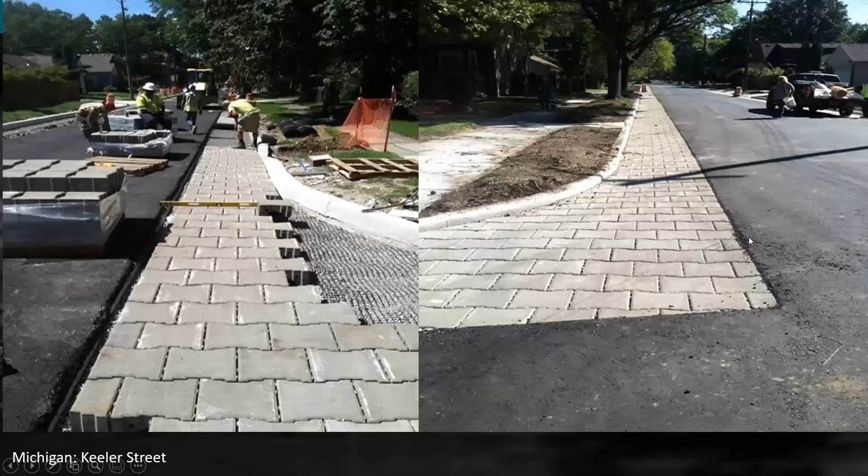All right, let me show you some case studies from around the United States. This one's up in Michigan, called Keeler Street. This is a retrofit project, I believe, where they did a traditional asphalt pavement in the drive aisle, and then retrofitted the gutter, about 4 or 5 foot wide, with these open joint pavers. What's really cool is an engineering firm did a little maintenance case study. You can see all the trees in the landscape. This is a residential neighborhood.

So it didn't take long for the grass clippings and leaf litter to clog the joints of these pavers. This is a paver that infiltrates at over 1,000 inches an hour, but if you have a high sediment load or high leaf litter load, this is what ends up happening. What's really cool is a year later, they came in with that vac head attachment I just showed you and cleaned up all this permeable pavement. And if you look at the results, at Keeler Street the 2 locations they tested were the open joint pavers, and Artesian Street was a porous asphalt portion.

So if you look at the before cleaning, on Keeler 1, it was at 200 inches an hour. Keeler 2 was almost to 0 right there. 49 inches an hour isn't that much. But what's great is you look at the infiltration rate after they clean. Keeler Street was able to get up on the number 1 location to over 1,000 inches an hour. And then the number 2 location got close to 1,000.

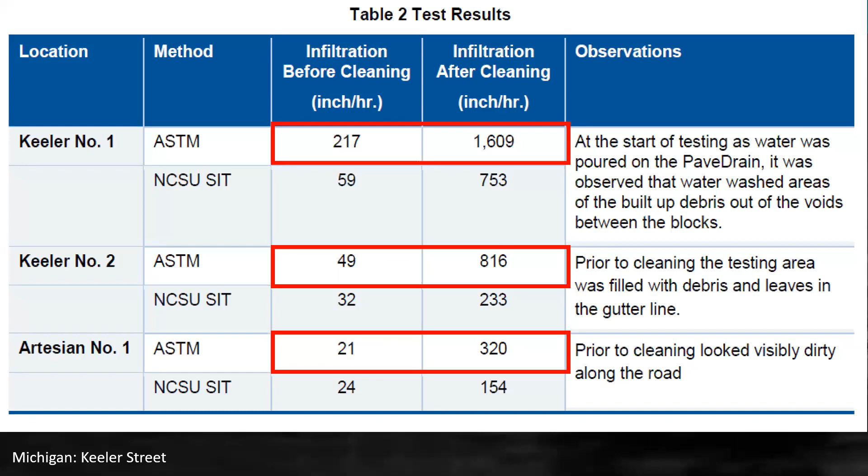And then here's a cool little case study. This is one of our first projects we did in New Orleans. In fact, I think the engineer who designed this is actually on this webinar. So what we did here, this is a combination where we did open joint permeable pavers with an underground detention system. And I really like this project. I live nearby it, so when it rains really hard, I get to go out and take photos.

And you can see, if you look at the landscape over on the left, there's probably 2 or 3 inches of water in that mulch bed. But if you look at the pavement, it's draining pretty well. So the challenge with this project was that we really didn't have a lot of footprint. That building took up most of the footprint of the lot. And there was about 1,200 square feet where they could do detention and permeable pavement.

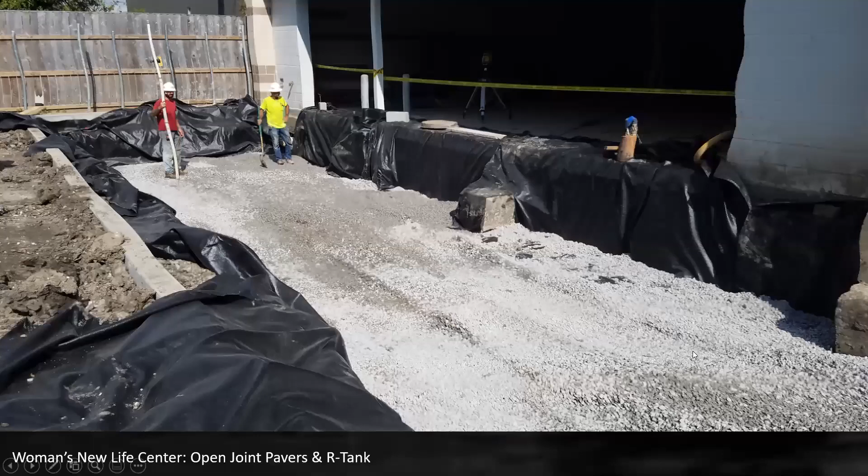So we ended up excavating out a large portion right here, about 2 or 3 feet deep. We ended up installing an R-tank system, which is just an underground detention system. It was wrapped in filter cloth, and then we installed the open joint pavers right on top. So what you're seeing here is the installation process. It's a pretty small site, very congested, but at the end of the day, we're able to solve the problem.

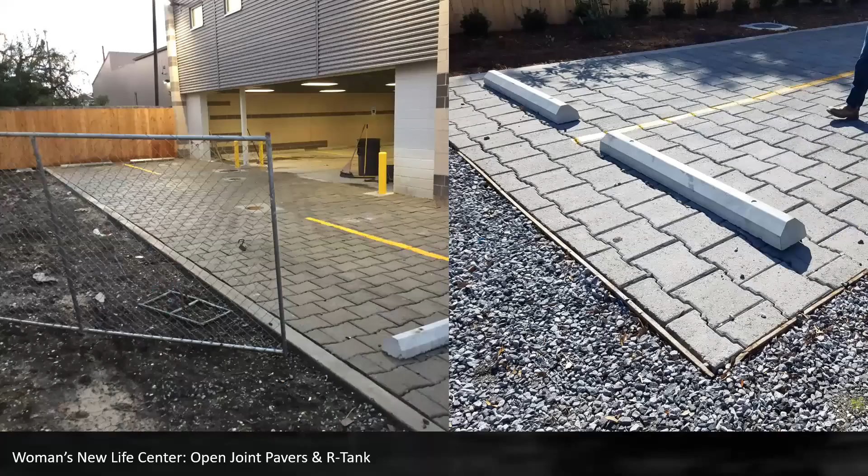Now one of the issues we had was the contractor, for whatever reason, didn't pour curb on this edge over here. And so they ended up just putting a piece of lumber. Like I said earlier, curb details are important. After they installed it, they backfilled some aggregate behind the boards to kind of hold it up. But that's not very permanent. And so they actually had a maintenance vehicle drive up next to here, and it ended up crushing part of the board and making some of the pavers settle. So we had to come back and repair this. But that's always important to make sure you have that curb detail around it.

But overall, it's done really well. I believe we installed this in, I think it was 2017, 2018. And so far we haven't had to do any maintenance. If you go out there, there is some leaf litter in the joints and all that, but it really hasn't affected the performance too much.

And then I wanted to show you this case study. This is an example of how you can use permeable pavement with, like I said, an underground detention system. But this is more of a multifunctional system. So this particular property was a corner lot on a bigger retail development, and they didn't have enough room to do a detention pond. So they had to go underground.

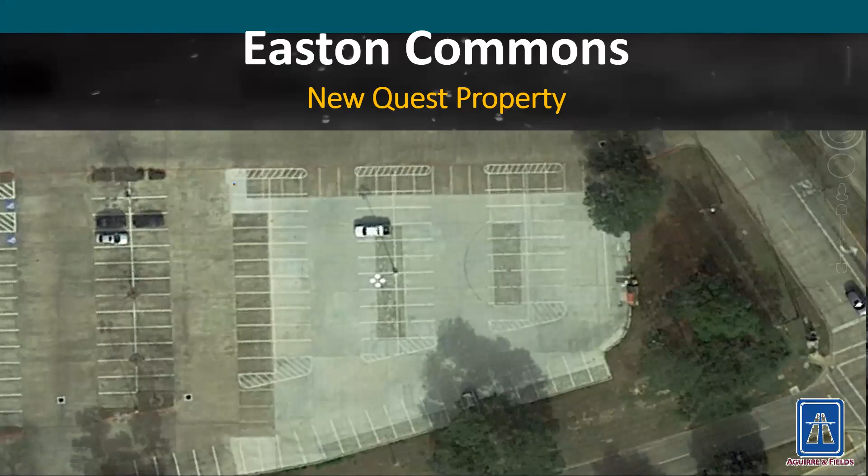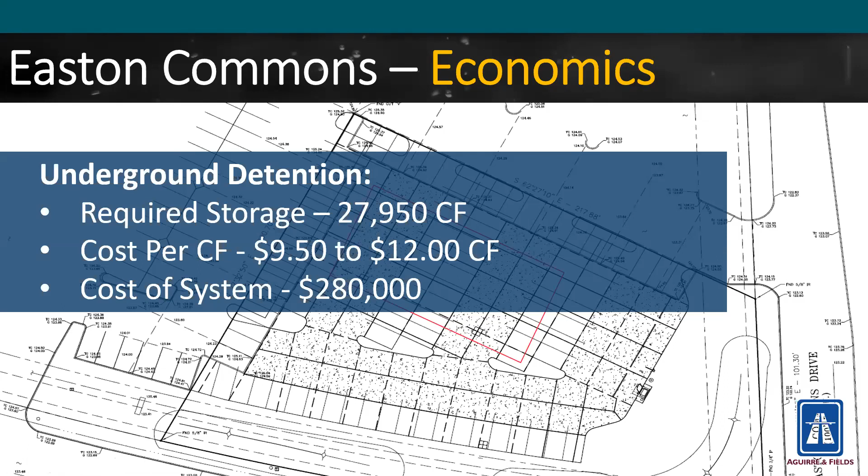And so what they ended up looking at first, obviously, was an underground detention system. And if you know anything about underground detention, it could be pretty costly. So they were looking at maybe $10 to $12 a cubic foot to detain their detention volume. So you're looking at a $300,000 price tag for the owner. So instead, the designer ended up combining a small bioswale in the right-hand corner there. And then they used these open joint pavers. So they had about 2,500 square feet of permeable pavers.

But that larger area that I have highlighted, that's actually an entire 7 inches of aggregate base. So instead of doing a detention system, they spread out the aggregate subbase. So they counted all the voids within those rocks.

So that all had traditional pavement, and then these other areas had just these permeable pavers, which acted kind of like your drainage inlets. And so there's kind of the cross section of what we did there, and then there's the bioretention cross section.

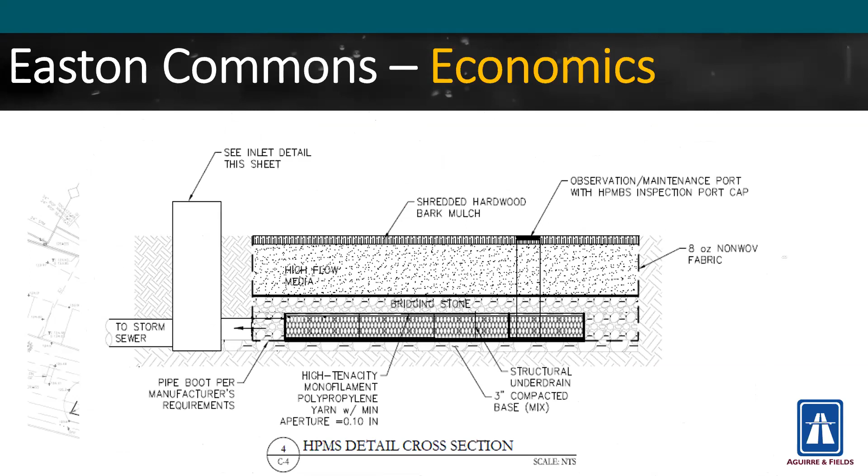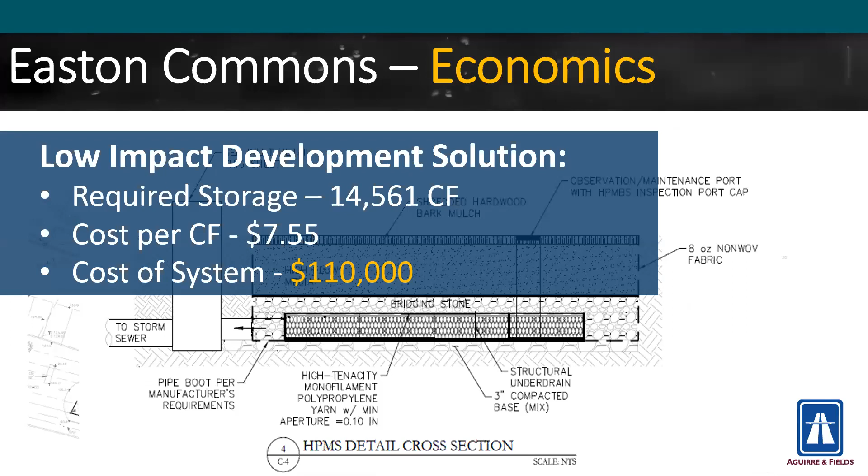But what I wanted to show you the importance is the cost of the system. So one thing about Harris County where this project was done is they'll let you do a reduction in your detention volume if you do a low impact development design. And so they ended up cutting down the cost of their stormwater management by a third by integrating bioretention, permeable pavement, and aggregate subbase for storage.

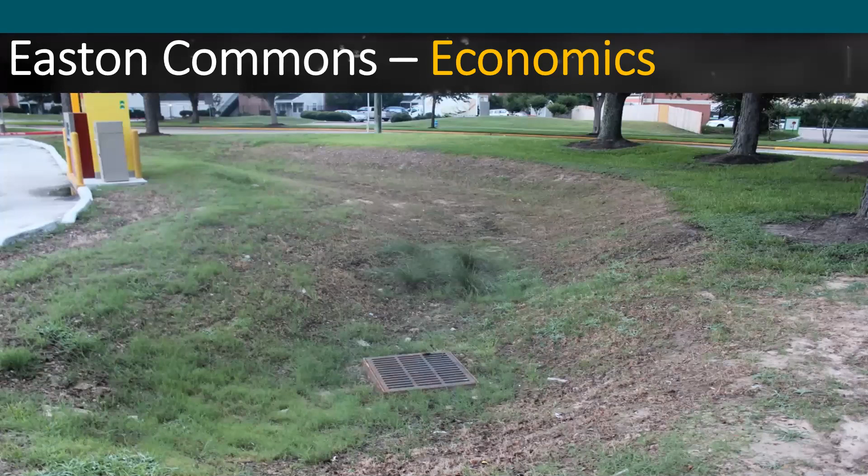So if you go out there, all this concrete you see right here has a 7-inch layer of aggregate where they store stormwater, and off to your right there, there's the actual open joint paver. So that's actually what captures all the stormwater. And then where those curb cuts are, that actually drains into a bioretention system. So they were able to take advantage of some surface storage, some underground storage, and some permeable pavers to end up cutting down the overall cost of the system.

And another good thing I like about using permeable pavers is combining them with trees. So, you know, we all know that urban trees don't do too well, right? They don't like compacted subgrade. They can damage your utilities or actually upheave some of the pavement. So you'll see a lot of people use these structural soil cells. So what they do is they provide the load support for your pavement while allowing all the soil that the tree uses to be uncompacted and healthy, and so it allows that tree to reach its full maturity.

But in this particular project, we installed some permeable pavers on top of the soil cells. So now when it rains, the voids in that soil will act as a detention, and then the trees can help soak up that water. And so it's another good way of combining BMPs and really taking advantage of your entire landscape.

People don't often think that trees can be used for stormwater management. But if you have enough trees on your site and you use these soil cells and permeable pavers on top, you can get all of your required detention volume in the soil if you really designed it correctly. So this is another good benefit of doing this. And we've done this on a couple other projects. They're usually either roadway projects or city projects, but it's another good way of combining those BMPs.